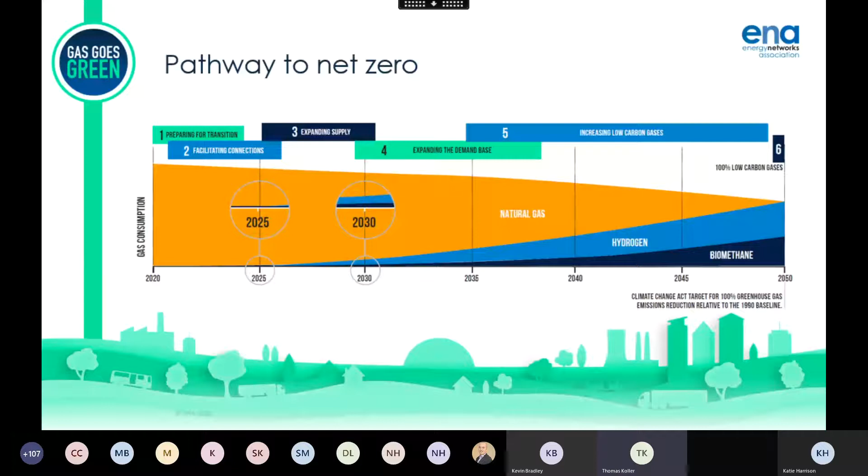In hearing from the expert speakers IGEM and ENA has lined up, we'll understand the timelines for gas safety management regulation changes, understand the timelines for IGEM's gas quality standard, understand the evidence base that's been developed to date, and also we'll hear about the gaps in understanding, where through their consultation IGEM would really like to hear from you all.

So, as you can see on the agenda on the next slide, we really have gathered together some of the UK's leading experts on this work, and we have a packed agenda for you. First up, we're going to hear from Ian McCluskey, who's the Head of Technical Services and Policy at IGEM, and Ian's going to provide us with an overview of the new IGEM gas quality standard for net zero emissions.

We're then going to hear from Dave Lander. Dave Lander Consulting has been working on a number of elements in regards gas quality, and he's going to discuss the Dutton method. Dr. Martin Brown, Principal Specialist at DNVGL, will then present on the domestic customer's case for change. And Dr. Sarah Kimpton, Senior Principal Consultant at DNVGL, will then discuss gas quality variations and industrial and commercial customer case for change. And we'll then hear from Dave Lander on the network safety impacts, before we then finish with a further Q&A hosted by Ian.

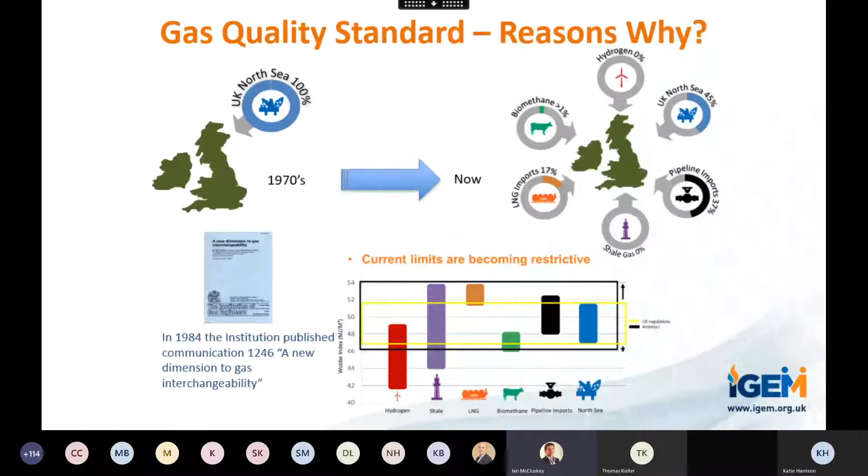Next slide, please. So in 2016, meetings were held with Ofgem, Health and Safety Executive, DECC, now BEIS, and IGEM, to explore setting up an expert working group to investigate potential changes to gas quality. It was agreed that IGEM would develop a new industry standard that would meet current and future gas supplies for the UK. At that time, it was proposed to initially examine the evidence base for changes to the upper Wobbe limit based on extensive research undertaken by SGN on the Oban project, opening up the gas market.

The expert working group would then later consider examining the evidence for the widening of the lower Wobbe index and other parameters. It was essential that the review process consider previous studies in this area, plus also look at current and new research to consider not just domestic, but also assess the impacts of any changes on industrial and commercial equipment, and also assess the impacts for network safety.

It includes the Health and Safety Executive, gas producers, networks, as well as organisations representing appliance manufacturers. I'd like to take this time to thank all members of the expert working group for their support and contributions to drafting of the standard. In particular, I'd like to thank Gus McIntosh of SGN, who's chair of the working group.

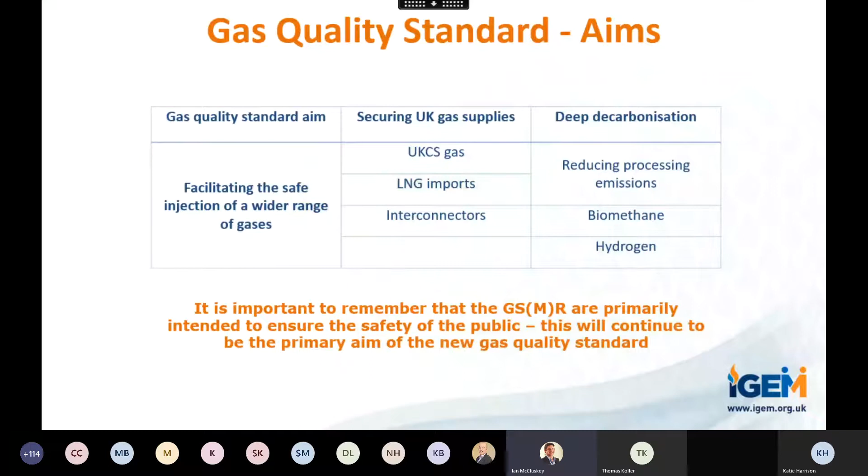Next slide, please. During the period of the review for the past 4 years, we've researched extensively many existing reports in this area. And on this slide, you see some of the reports that we're going to be outlining today include, for example, the SGN opening up of the gas market that I mentioned earlier, which is perhaps one of the most extensive areas of research ever undertaken.

SGN operating under an exemption to supply 4 Scottish towns with high Wobbe gases provides an evidence base for domestic and small commercial appliances, some 8,000 properties, some 11,000 installed appliances, and since the project ended in 2016, they have continued with random checks totaling approximately 4,000 checks.

Another important report is the industrial and commercial research into appliances and applied research into the effects of the wider range of Wobbe gases that was undertaken. There was also an impact study which examined the lower Wobbe index gases. The aim of that study was to provide the evidence of the impact of utilisation of gas of quality down to the existing emergency Wobbe index lower limit.

Another important report that Dave Lander outlined is that some 40 years since conversion, UK appliance types and designs are now widely different, and it is therefore considered appropriate to revisit the Dutton approach and assess its usefulness for existing and future gas supplies.

And finally, Dave will also talk about the study comparing pipeline fracture propagation risks from natural gases of differing Wobbe index, and the report examines whether there would be an increase in risk of pipeline fracture propagation in the event of any pipeline failure, and details an assessment of the change in risk associated with the conveyance of natural gases of higher Wobbe index.

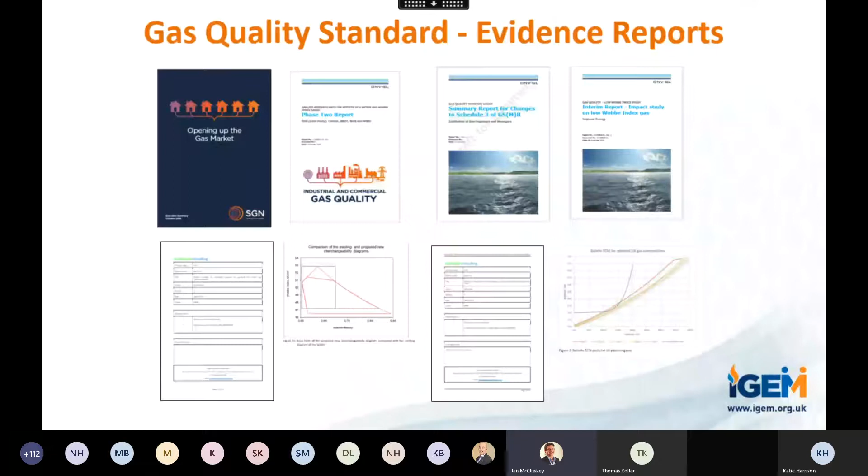Now, next slide, please. So now we've reached, as I've mentioned, this key milestone, which is the industry-wide consultation stage. And to support the consultation, we published this evidence report. It's called a key step on the pathway to net zero emissions. And the report explains the proposed changes to the gas specification, which I'll outline in a second, and provides reference to all the extensive supporting technical evidence.

The report outlines the existing gas quality issues, the updated Dutton interchangeability diagram, the case for domestic and industrial and commercial appliances, as well as the impact on network safety. Now, the proposed IGEM standard will be a dynamic framework for changes in gas quality, but the enduring safety of domestic consumers will be paramount, and the HSE will continue to have a veto on any proposals that could compromise safety.

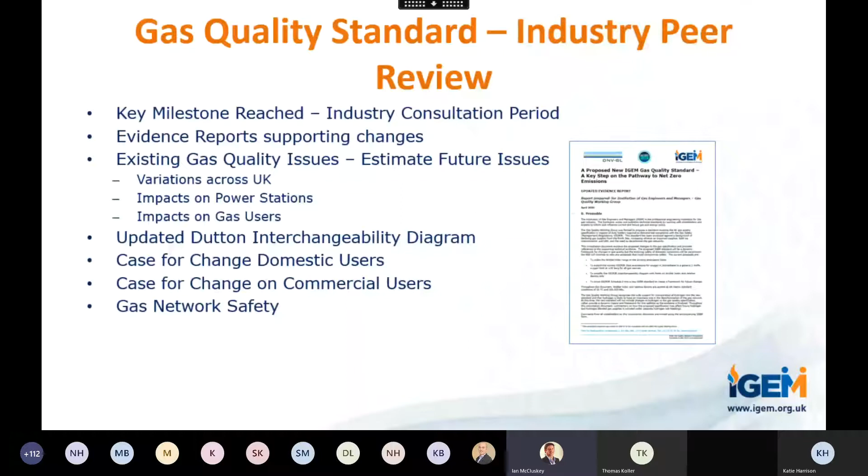Next slide, please. So I'll now introduce the changes that are being proposed, and within the report there is a table, and that table provides a summary of the proposed changes from Schedule 3 to the new IGEM standard. I've highlighted those in red. You'll see there's no change to hydrogen sulfide content. There is no change to total sulfur content. And at this stage, though we are preparing for it, there is no change to hydrogen being proposed. That still remains at 0.1%.

Oxygen content will move up from 0.2 to up to 1% for networks operating below 38 bar, which reflects the current class exemption for biomethane. We'll also widen the Wobbe index by decreasing the lower limit and increasing the upper limit. So the decrease to the lower limit is from 47.2 to 46.5 megajoules per cubic meter. We'll increase the upper Wobbe index limit from 51.4 to 52.85. The incomplete combustion factor will be removed.

And on the next slide, we'll continue with a summary of the changes. The sooting index will be removed by the proposal. And having removed those interrelated safety parameters, we're simplifying in the proposal the GSMR interchangeability diagram to a Wobbe index of the range that we described and introducing a new maximum relative density of 0.7. And finally, removing the upper and lower emergency limits, as these will now become the normal limits. Now, that's the summary of the changes.

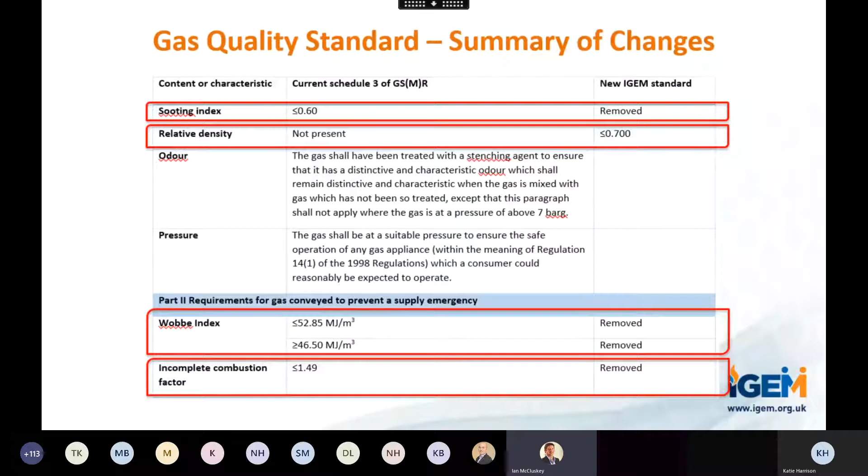On the next slide, I'd just like to highlight the link to the website. Now, IGEM's website has the evidence report. It also has the standard. It has a governance document on there for changes as well, the consultation period, and an example there of the link to the website. Please, we welcome your comments on the draft standard, particularly any comments relating to the scientific evidence which can be found on that link also. And that consultation period ends at the end of July, on the 30th of July.

So thank you for that. That's hopefully setting the scene for what's going to be presented to you in the sessions that will follow.

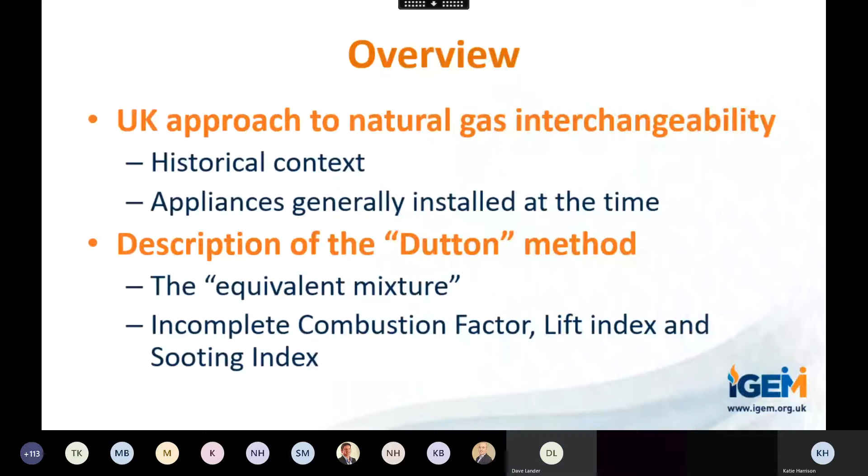Okay, so a little bit of discussion on the choice of the limit values that Dutton made then, and maybe a commentary on what we're proposing now. And probably the biggest change is the actual second of the two interchangeability parameters that are used. So we'll be switching or proposing switching from Dutton's GSMR interchangeability diagram to a simplified diagram that involves Wobbe index and the relative density. Next slide, please.

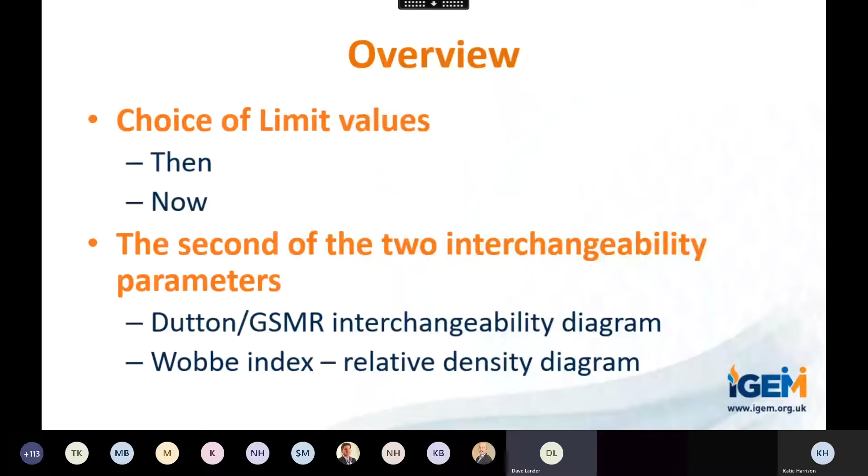Okay, so from a historical point of view then, most of this work really started in the 1970s and the 1980s. In that situation, we had southern North Sea gas fields dominating gas supplies, but it was anticipated that there would be a decline in those supplies, and those would be replaced by other sources, which would be different and more variable. And essentially those were northern North Sea supplies, which tended to have a higher Wobbe index. But also Dutton noted at the time that eventually these would be replaced by manufactured SNGs. That's probably not quite the scenario that actually panned out. I think we were anticipating in the late 1990s for substitute natural gas to be made in quite a significant proportion, but that hasn't happened as of now.

Okay, so there were drivers for interchangeability methods. So principally safety. Domestic appliances essentially have very limited tolerance to variation in combustion characteristics. So effectively you have to make the gas to suit the appliance and not vice versa. There's also a commercial driver, of course, and that is simply that you want to treat gases as little as possible in order to make sure that they're interchangeable. Next slide, please.

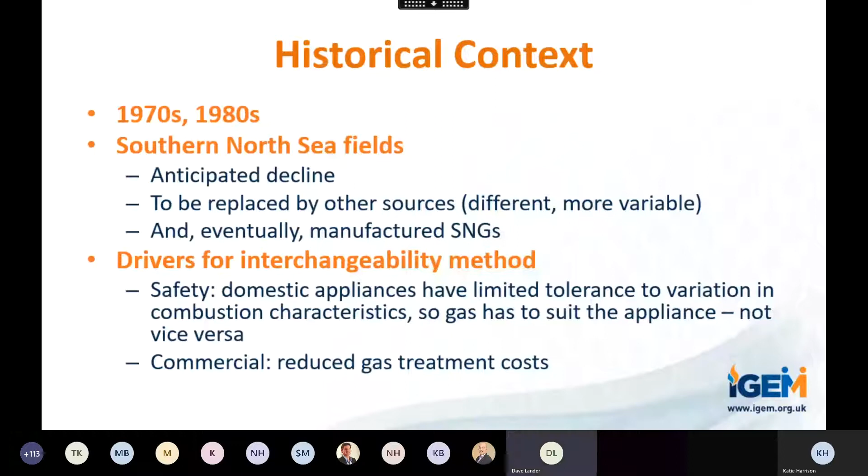So effectively, British Gas Corporation adopted the approach that was developed by Brian Dutton from the Watson House Research and Development Division. And there were a series of research papers that were published, but summarised in what is now the well-recognised IGE Communication 1246. So that was published in 1984, but based on experiments that were carried out in the 70s and the early 80s. It was a new approach at the time. Prior to then, appliance effects and flame phenomena that were related to gas composition were essentially related to functions that were effectively measured and very often based on properties like burning velocity. But Dutton's approach was to relate those to compositional variations.

You have to remember as well at the time that there were significant developments in gas analysis, and some of the early process gas chromatographs were being developed at around that time too. So it was a convergence of the ability to analyse gas routinely and cheaply and use that data to correlate properties of the gas being conveyed. And Dutton's approach was effectively implemented into the Gas Safety (Management) Regulations in 1996, and that essentially was at around the time of the initial start of gas privatisation too. Next slide, please.

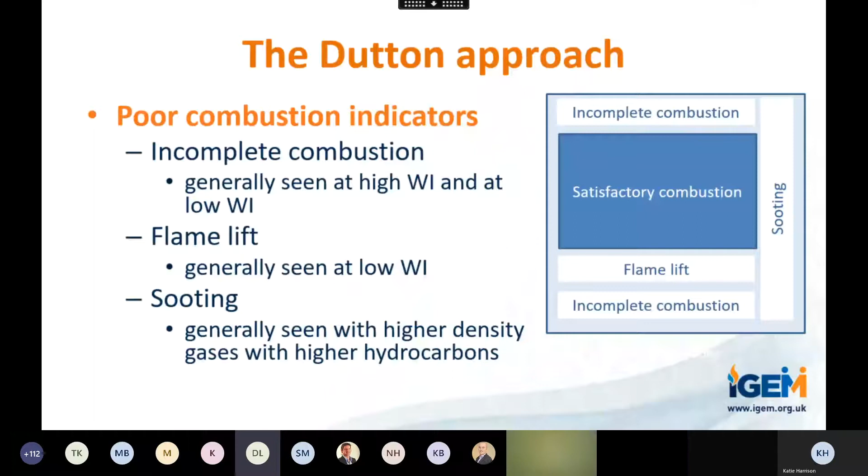And so those three poor combustion indicators were tested by Dutton, and he carried out testing of a variety of appliances that would demonstrate the three poor combustion indicators. So for incomplete combustion, Dutton looked at instantaneous water heaters, a very common appliance at the time. For flame lift, he looked at cooker hobs. And for sooting, he looked at radiant gas fires.

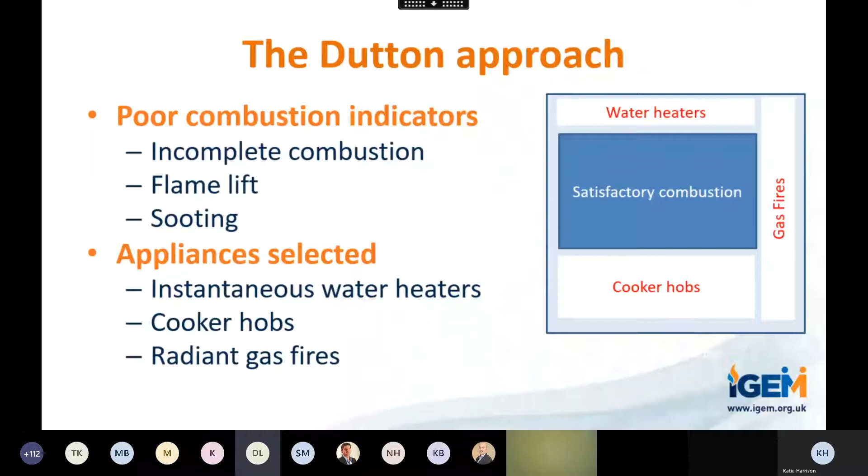Next slide, please. And it's the performance of those appliances which really set the basis for the limits in those particular properties. So I mentioned that the Dutton approach uses gas composition, and the first step is to simplify the gas composition. Natural gas is quite a complicated mixture. It sometimes contains more than 11 components, and so to get easier interpretation of the data, he converted the gas composition into an equivalent mixture of methane, propane and nitrogen, and in some instances hydrogen.

This process of converting to an equivalent mixture is a well-recognised approach, used quite often, particularly in reservoir modelling, where you can simplify a composition and get equivalent properties for that mixture. To do this, Dutton replaced all of the hydrocarbons with an equivalent amount of methane and propane. Any inerts were converted to a single nitrogen component, which preserves the Wobbe index of the original gas mixture.

So once you've carried out this process, your 11 component mixture is converted to a mixture of methane, propane, nitrogen, and possibly hydrogen if there is any in there. And so you have a simplified, what's called equivalent gas mixture. In carrying out the testing, he identified 3 interchangeability parameters that could be related to the composition of the mixture. The first was the incomplete combustion factor, which characterises the formation of carbon monoxide.

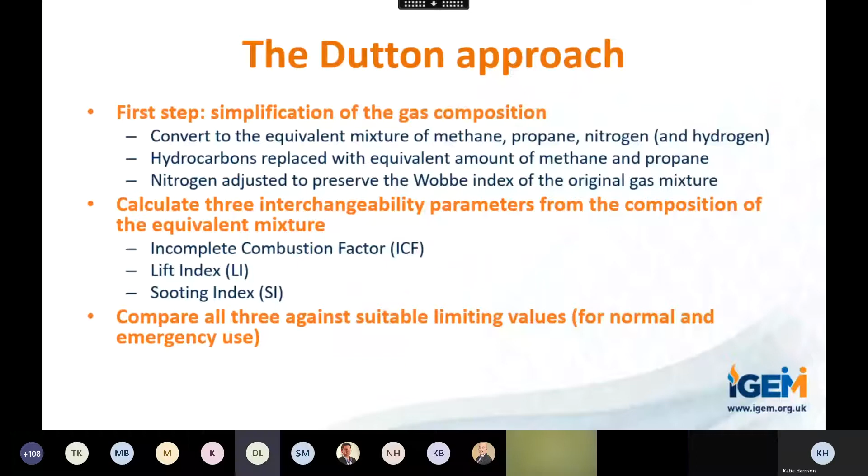So Dutton characterised limit values for all of these properties, but it's quite nice to be able to visualise the region in which normal operation is preferred. He did this by developing a diagram in which you plot Wobbe index and what's called the PN number, which is the sum of the nitrogen and the propane in this equivalent mixture. That allows you to visualise areas in which gas would normally be deemed interchangeable.

This is the simplified version, which was adopted into the Gas Safety (Management) Regulations. That central region is where normal operation gases will be considered interchangeable, bounded by 4 surfaces. The lines to the left are essentially compositions that are feasible. Anything to the left of that line would be considered unfeasible unless there was hydrogen in the mixture. For hydrogen-free gases, those gases just don't exist outside that region.

To the right, the line that slopes from top left to bottom right is the sooting index line. Gases to the right of that line would generate more soot than desirable. The upper and lower blue lines are the limits formed by incomplete combustion on the top line, the incomplete combustion factor, normally set at 0.48. That corresponds to a Wobbe index of roughly 51.41. Where the blue line intersects the red line on the left, that line is for a Wobbe index of 51.41.

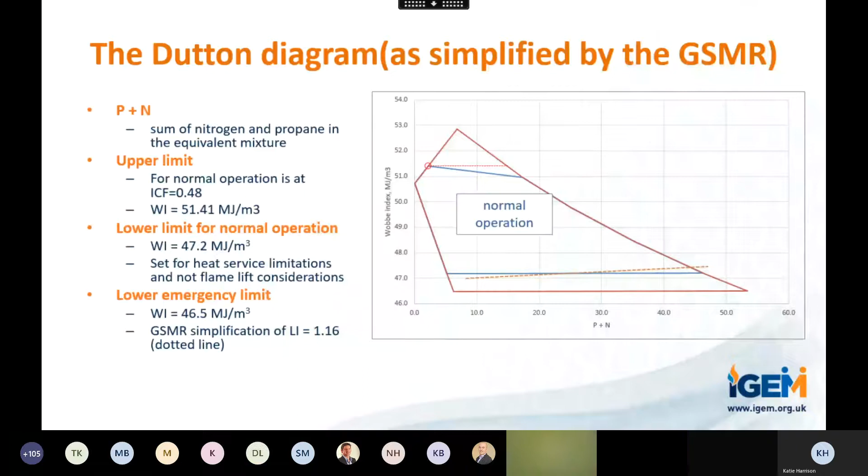Okay, next slide, please. So based on the Oban work that we had carried out with SGN, what came out was a proposal to replace the Dutton diagram plot for Wobbe index against the PN parameter, but to replace that with a Wobbe index versus relative density parameter. There are two key reasons for that. Firstly, it's consistent with practice elsewhere in Europe, Western Australia and the United States. During the developments on the European harmonised gas quality standard, the relative density Wobbe index plot emerged as the sort of favoured approach.

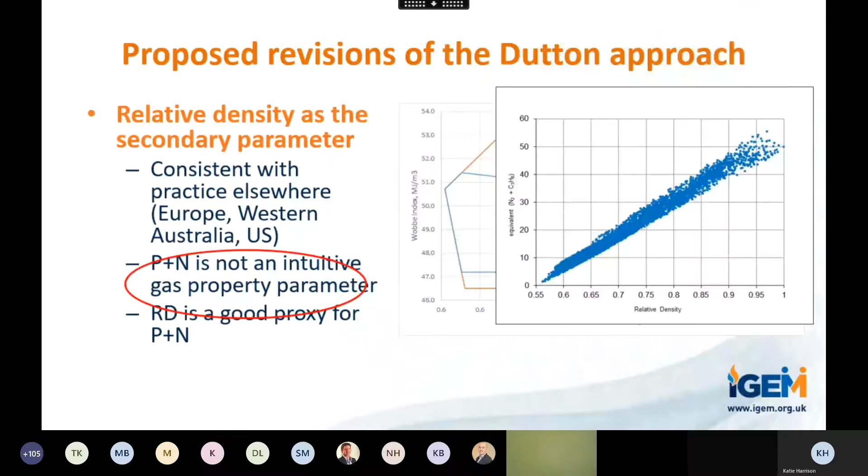Okay, next slide, please. So our proposal then is that relative density would be the second parameter, and we have proposed that the limit value should be set at 0.7, and that corresponds effectively with the European view, which developed when they developed the European standard EN 12676, which was subsequently adopted as a British standard.

The sooting index limit of 0.6 is not really a safety related parameter. It's really to do with discoloration of radiant heaters, and that value of 0.6 intersects with the 0.7 at around about that value that's indicated there. So the drop in the Wobbe index is quite small because the relative density constrains that drop quite effectively. There are very few gases in the UK that would have a relative density greater than 0.7. Next slide, please.

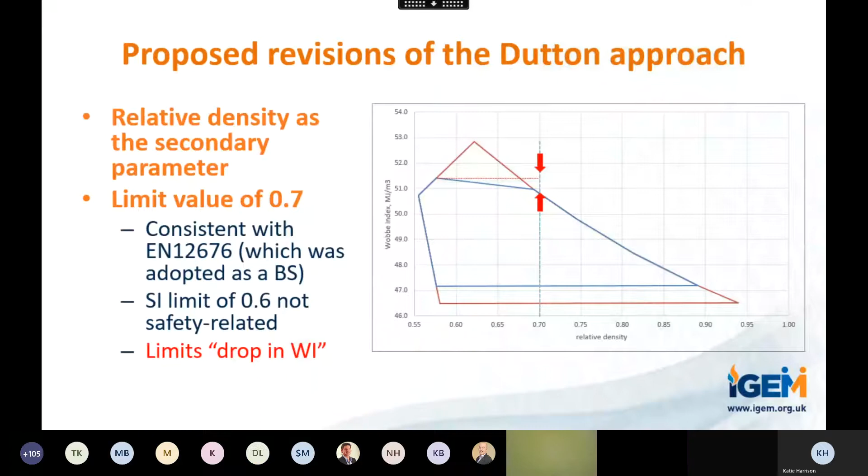So this is the proposed interchangeability diagram that incorporates relative density limits and also incorporates upper and lower Wobbe index limits. So in terms of the ICF limits, the ICF lines are close to horizontal anyway over the proposed relative density range, and so our upper limit is quite a tolerable simplification, and it's also consistent with practice elsewhere. Next slide, please.

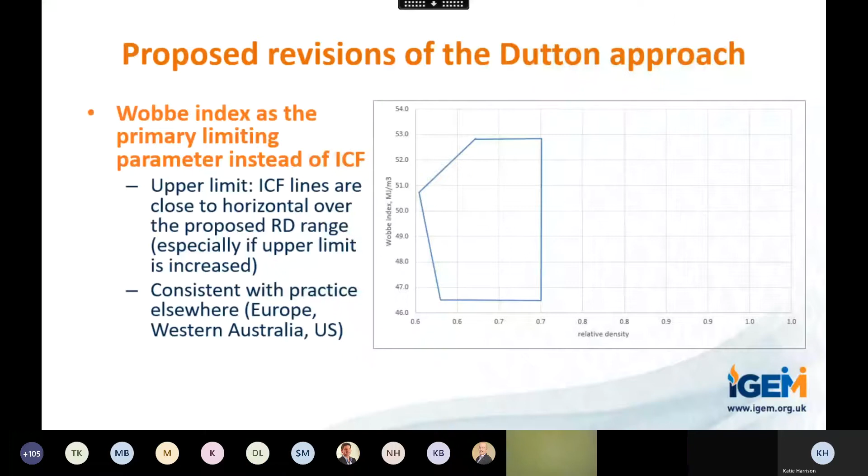So as I mentioned, our first proposal is that the upper limit value will be increased to 52.85, and that corresponds to the current emergency limit value. Next slide, please. And the lower limit value, we're proposing would be reduced to 46.5, which is the current emergency lower limit value. Next slide, please.

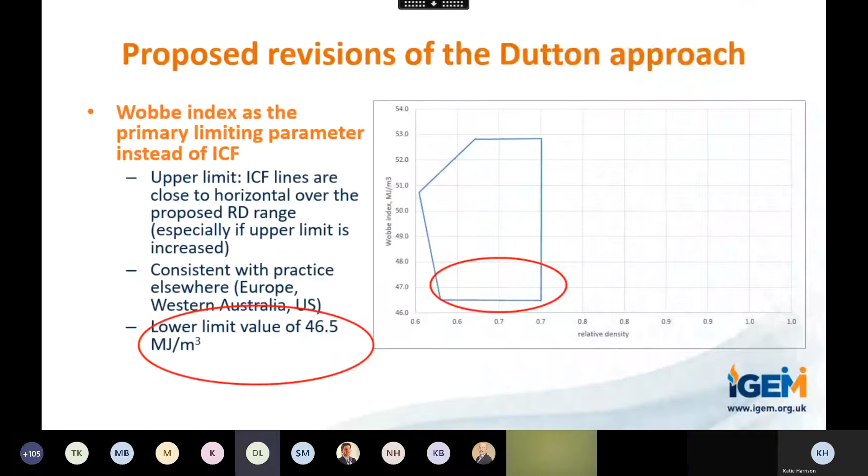So I'll just briefly cover the logic behind setting those upper and lower Wobbe limit values. So firstly, the upper limit, why should that be set at 52.85? Well, the main outcome from the IGEM project, the Opening Up the Gas Market project, was that domestic and small commercial appliances, when correctly installed, serviced and operated, can safely burn gas with a Wobbe index up to 54.7. So that's quite a high limit value. It's consistent with the main findings of the GasQual studies.

The GasQual study was the pre-normative study carried out by a consortium of European gas appliance testing laboratories, and they fed all of their information for consideration by the working group that developed the European standard on harmonised gas quality. So the OGM project produced findings that were consistent with GasQual, and equally those findings were consistent with earlier testing that was carried out by DNV GL in support of the UK tripartite gas quality study.

I should also say that that's also consistent with even more recent studies that have been carried out by HyDeploy, which is looking at addition of hydrogen into gas supplies. And again, there's a major body of technical work on appliances that is also justifying those limits too. Okay, next slide, please.

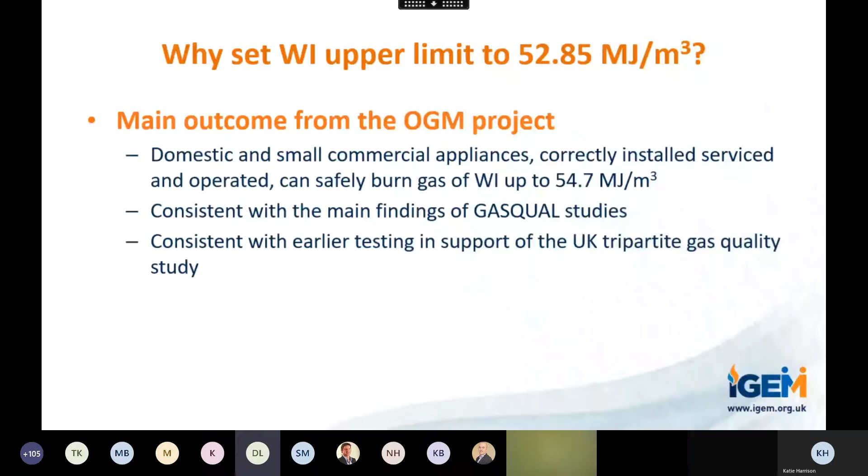It's also instructive to look at the origin of Dutton's incomplete combustion factor specification. So I'll just talk a little bit about incomplete combustion factor. So effectively, Dutton defined the incomplete combustion factor as the number of times that the CO-CO2 ratio in the reference gas has to be doubled to give you that you see in a test gas.

And Dutton chose the value to characterise incomplete combustion limit as being the instantaneous water heater, which is often unflued. And typically what he found was that the CO-CO2 ratio doubled every 1.5 megajoules per cubic metre. Now today's equivalent appliance, I guess, would be the combi water heater, the combi central heating boiler.

And if you do similar tests today, then typically what you find is that the CO-CO2 ratio doubles every 3 megajoules per cubic metre. And as a result, the correlations that Dutton produced that calculated ICF from composition didn't really correspond to today's appliances. Next slide, please.

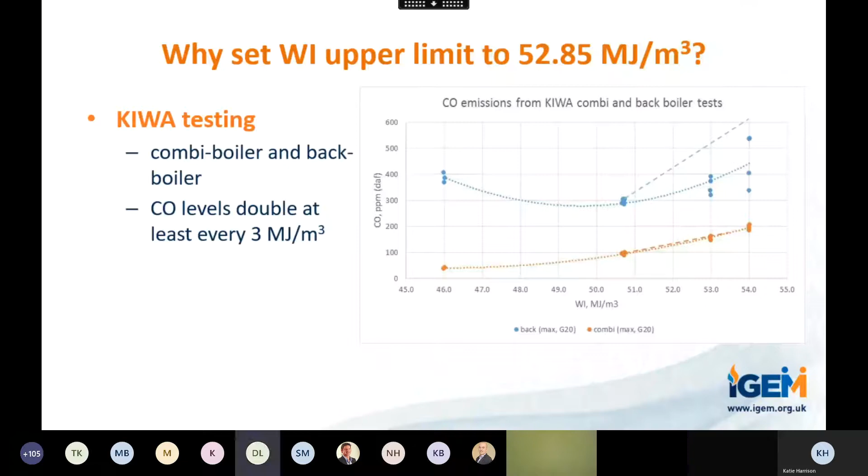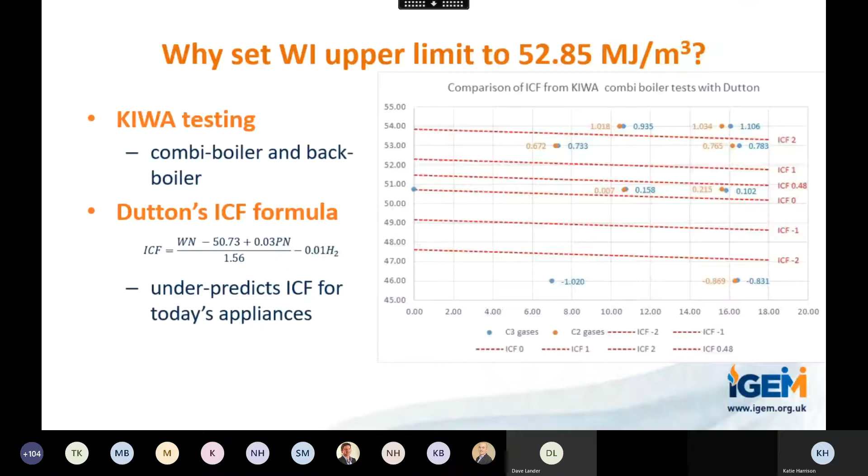So in terms of the ICF limit value itself, when Dutton was setting that, he was very conscious that traditionally at the time, the rich gas limit was set to around about 5% over that of the reference gas, which is G20, which is pure methane. And it should have been 53.3 megajoules per cubic meter, although there is some confusion in the actual communication, as he cites that as the wet gas value of 52.1. But essentially, for the dry gas basis, it should have been 53.3. But in fact, what Dutton adopted at the time was a value of 51.2.

And that really came about because of a survey of appliances that was carried out in 1978, which suggested that some appliances might have higher CO-CO2 ratios than would have been expected. It was a very small proportion of appliances, but they chose to lower the limit value, set it at 51.2 and not at 53.3. And the paper mentions that there was an expectation that they would review that in time. And there was a further survey of appliances, but again, they chose not to raise the limit value.

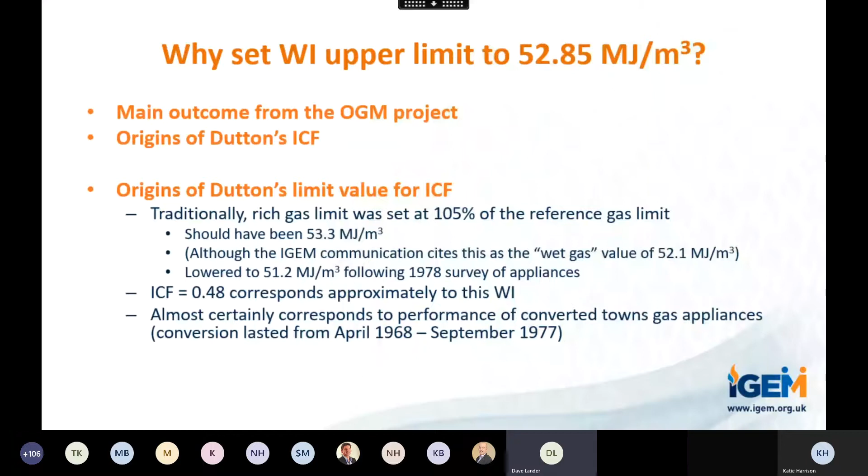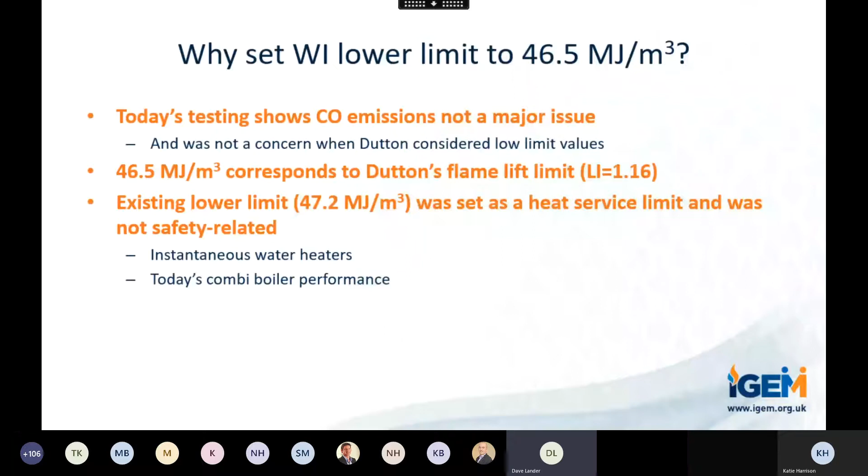The second change is the increase in the upper Wobbe limit value to 52.85, which is again more reflective of the performance of today's appliances. It still allows us a safety margin of 1.85 megajoules over the results of in-premises testing in the opening up the gas market project.

And finally, we're proposing decreasing the lower Wobbe limit value to 46.5. CO isn't really an issue at this level, and it's effectively Dutton's flame lift limit. We're proposing that that's the appropriate limit. The existing lower limit value of 47.2 was really set on the basis of heat service, and again, that's on the performance of instantaneous water heaters, at the time of natural gas changeover.

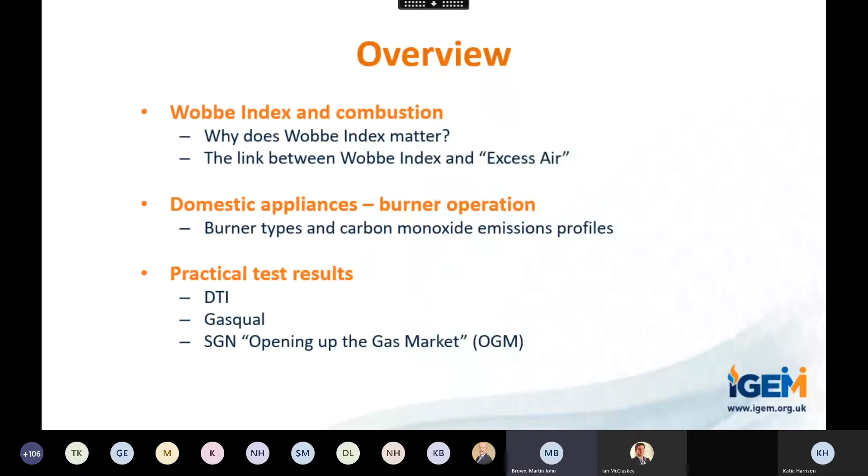So why do we get hung up about what Wobbe index actually is? Well, Wobbe index is a key indicator of what is termed gas quality, the ability of appliances or different equipment to actually burn gas. One of the nice things is that it's been adopted as a key parameter worldwide, so you can talk about Wobbe index and that's understood by combustion engineers, appliance development people, and gas quality people around the world. It's very important for determining the interchangeability of these different gases.

And why is it important? It's an indicator of the actual heat rate going to the burner. This has been discussed in the chat as well, if you've been following that. Different gases with the same Wobbe index should give overall the same burner performance on the same appliance. One aspect the Wobbe index links to is that it's related to the excess air available within the combustion system. Appliances will be set up for a particular excess air level to ensure good performance with the reference gas and enable the other test gases used to be burnt in those appliances while still meeting the certification standards for CE marking. So it's an important parameter, linked primarily to safety, performance, efficiency, and operation.

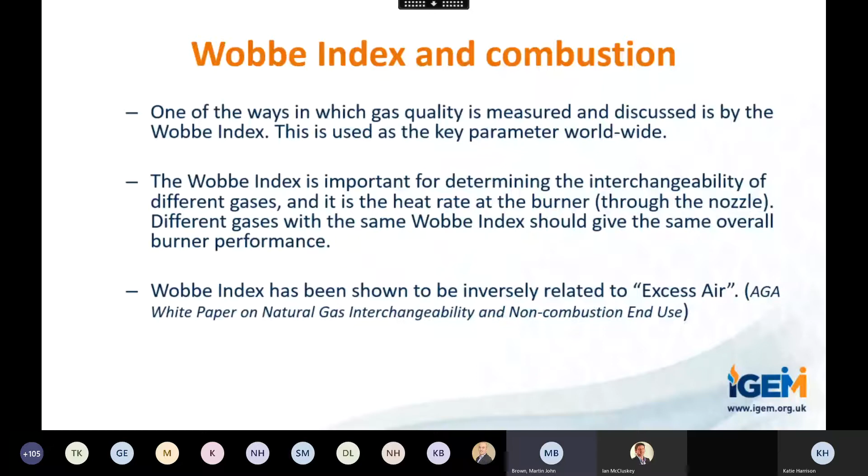Clearly, for stoichiometric combustion you don't need any excess air, so you'll be down at 0 for that. Now that would actually result in quite a high carbon monoxide emission, so the majority of systems tend to operate with at least 20, possibly even 30% excess air.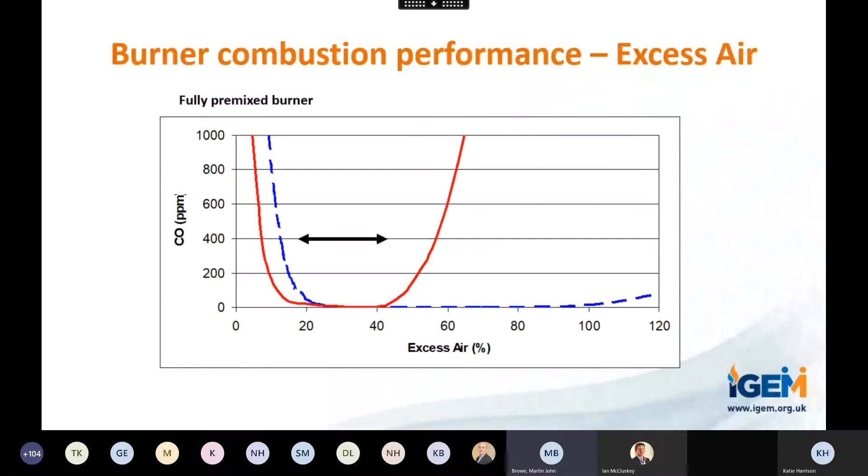As I mentioned in the introduction, the level of understanding that's been developed over a number of years has ramped up significantly. It was recognised early on that the impact of different gas qualities on modern appliances wasn't fully understood, and the DTI were looking to evaluate what the impacts would be through changes of the gas quality range that could potentially be distributed in the UK.

So they started some studies, sometimes called the tripartite studies, where they looked at different options with regard to gas quality in the UK, kicking it off in 2004 with a pilot study and then the main study in 2006. The pilot study was 5 appliances, the main study was 20 appliances. So it wasn't a large number of tests undertaken, but there were several key factors that came out of that.

A few years later, the EU Gasqual study ramped it up even further and did 100 appliances. Then with SGN's opening up the gas market study, they looked in Oban at around 2,000 appliances, and with the other Scottish independent undertakings studied, there were even more tests undertaken. So there's a good understanding now of what the implication is of different Wobbe index gases on a wide range of appliances, both in the laboratory and installed in a real environment in Scotland.

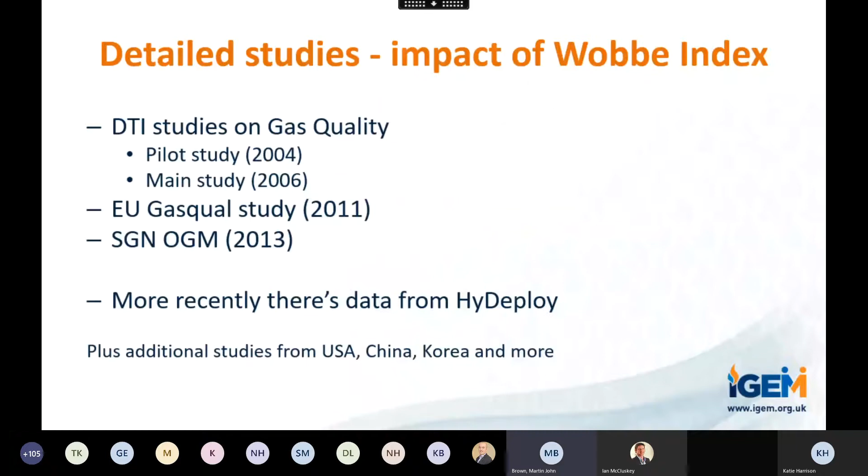So now what I'd like to do is just take you through some example results. And as I say, I don't want to dwell too heavily on this, but I'll be picking out a lot of trends and highlighting what the different studies have actually found as we go through. The format of the charts is very similar, and I'll just explain that in the first one, and then you can see how it cascades through to the others.

So for the initial study, as I said, 5 appliances. They looked at a Wobbe index range from 46 to 56, so slightly wider than has been considered for the potential changes to the requirements, the regulations that we're proposing now. But that gives a bit of a safety margin in terms of the understanding. With regard to the studies, it was focusing on the carbon monoxide and nitric oxide emissions, and then also looked at efficiency, and the efficiency was measured by a flue loss method. Next slide, please.

So here's a quick snapshot result of the 5 appliances. The 5 appliances are in the key on the right-hand side: condensing boiler, a water heater, a cooker, a fire, and a standard type boiler. The Wobbe index is on the x-axis, ranging from 46 up to 56. And the carbon monoxide emission is listed as a percentage on both of the left-hand and the right-hand y-axes. The left-hand one for most of the appliances and the right-hand one for the standard boiler.

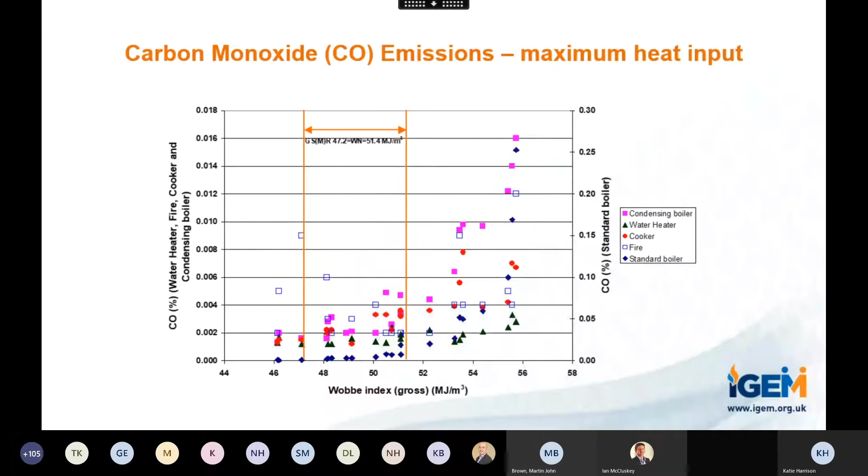That shows the impact on the NOx emissions. Again, it's on the left-hand side, the NOx ppm as a function of the Wobbe index on the x-axis, and you can see that the NOx actually increases as a function of the Wobbe index. Next slide, please.

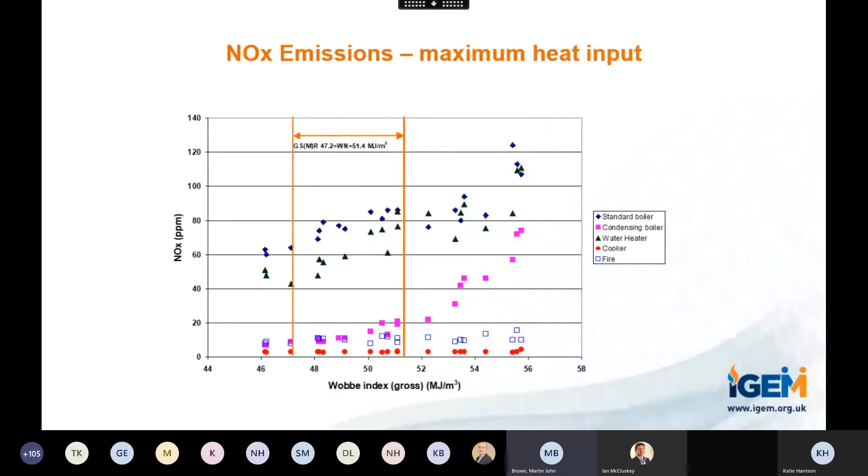And the flue efficiencies are reasonably constant actually, so there's not that much of a decrease in performance as you go down in terms of Wobbe index, and not much of an improvement in efficiency as you go up in Wobbe index. It's reasonably flat. There is a slight increase as you increase Wobbe index, but not significant. Next slide, please.

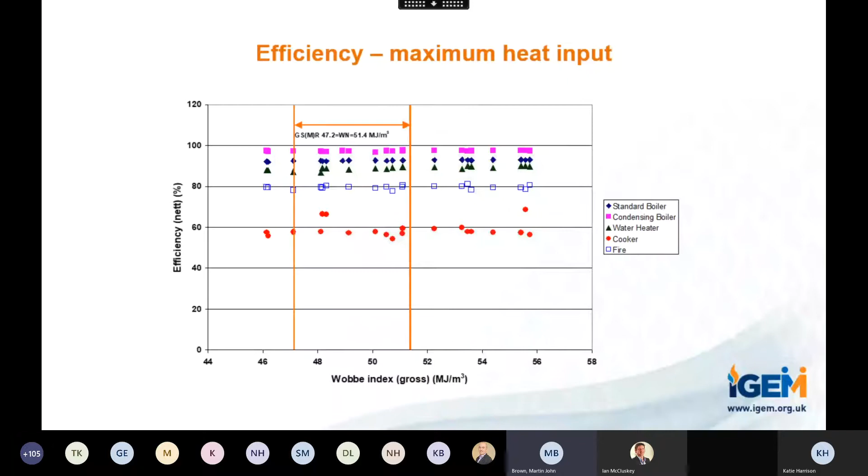So the first DTI study was then extended a couple of years later and increased the number of appliances to 20. These are mostly used appliances, but there were one or two new ones that were included in that test program. The Wobbe index range was from 45 to 56. Again, the focus was on carbon monoxide and NOx emissions, primarily from the point of view of safety, but also with regard to impact on the environment with regard to NOx, not only in the home for any indoor air quality aspects, but also NOx being emitted into the local atmosphere.

It was extended to actually include the impact of Wobbe index changes on the performance of the safety control systems, particularly the flame supervision device or the oxygen depletion sensors that some appliances have. The efficiencies were calculated in the same way as before. But they added in an additional test here where the appliances were serviced, so that the tests were done and then repeated once the appliance had been serviced, which could involve some maintenance work or some repair work, and the tests were then repeated with that serviced appliance. Next slide, please.

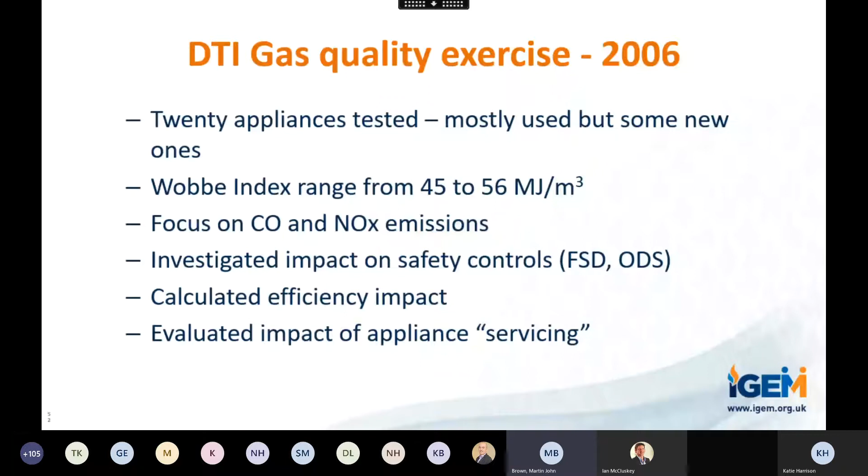So a quick example of the condensing boiler. Here it's got a premix burner, so it's the form of combustion profile that I showed earlier, and you can see that from a Wobbe index value of 45 up to 56 the CO emissions increase. Again, the gas safety management regulation band is shown in the orange bars. And the trend is fairly clear of increasing CO across that range.

If you prefer the dry air free CO percentage to be in ppm, you're looking at a range there from 0 to 400. So the values around the GSMR band at the moment range from around about 25 parts per million up to around about 75 parts per million.

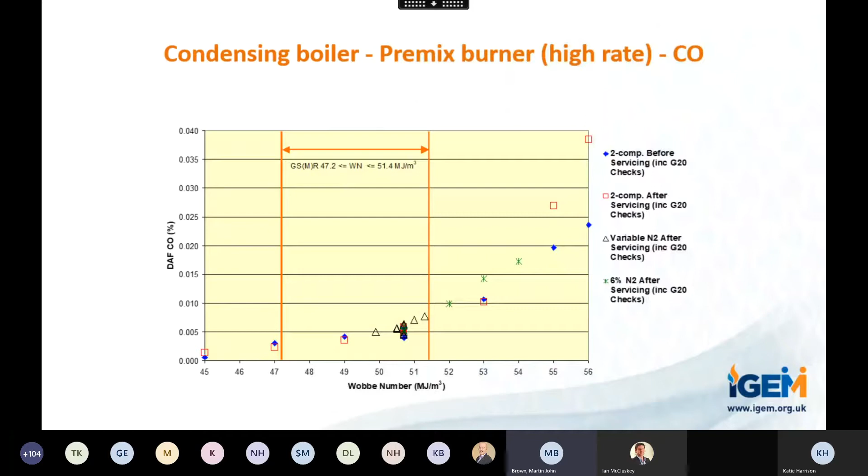You may query why there are so many different points at around about 50.7. That's the G20 reference gas. It's pure methane, and repeat tests were done with those gases after every other Wobbe index gas was tested to ensure that there was no lingering change to performance or impact from running those tests. So it was a cross check that the appliance was still behaving and operating correctly. Next slide, please.

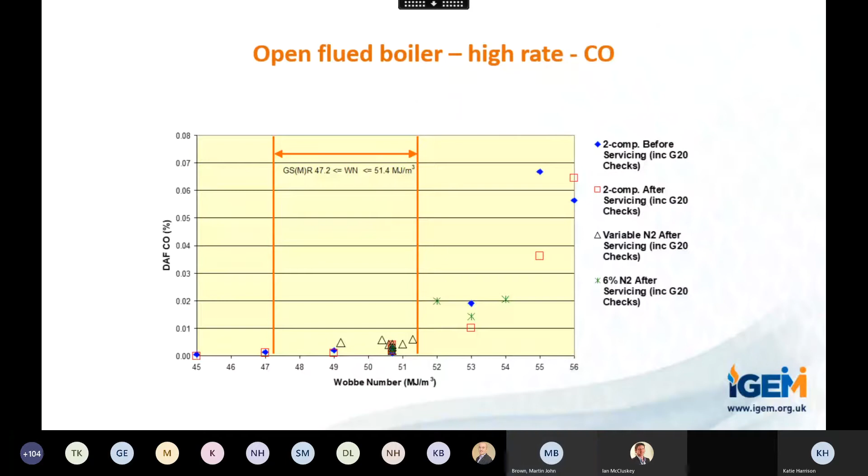The NOx profiles, as you can see, are very similar to the ones that we've seen previously, increasing NOx as a function of Wobbe index. Next slide, please. For the open flued boiler, the carbon monoxide, again, very low, within the range at lower Wobbe index, and then starting to increase as you go higher. But again, fairly modest increases. Next slide, please. And again, with NOx increasing as a function of Wobbe index. Next slide, please.

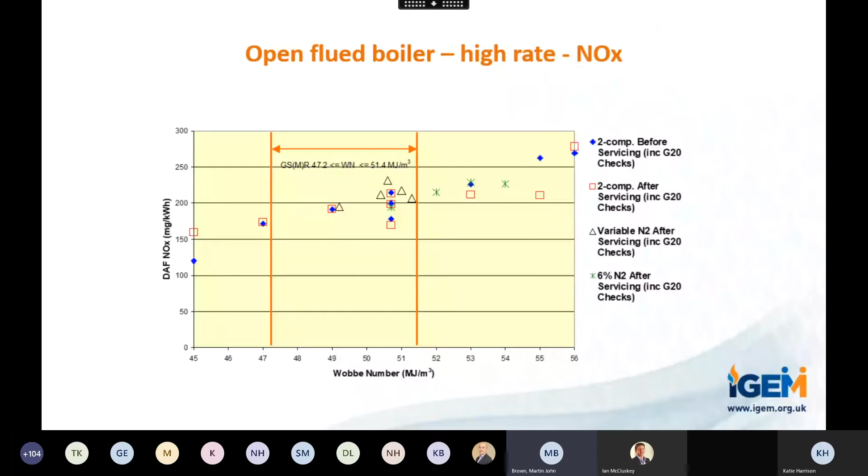GasQual took the testing program to the next level, and it was evaluating the impact of gas quality on safe operation, efficiency and emissions. 100 appliances were tested with a wide range of gas qualities. There were 16 companies involved in this from 9 countries around the EU, and 5 laboratories actually undertook a lot of the test work. Next slide, please.

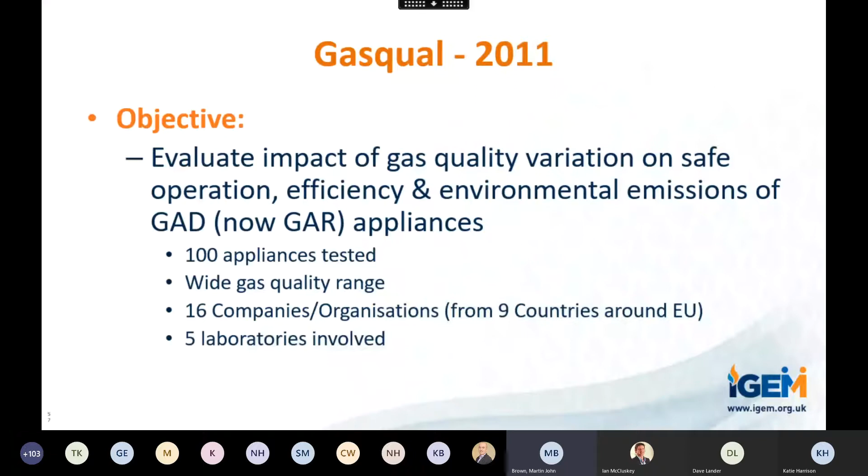The project was split into several work packages, and they involved both a study of the appliances that were actually installed around Europe, and an understanding of the different gas quality regulations and gas specifications that were actually in force around the different member states. It also looked at certification and how the appliances were tested for use in those different countries, and also a look at how the appliances were installed, particularly with regard to whether they were adjusted and altered at the point of installation rather than using factory settings.

Based on the range of appliances that were actually available, that sample of 100 were selected, tested, and then conclusions were drawn. And there's a bit of a feedback loop there to ensure that understanding of the results from the different tests that were undertaken was actually used to fine-tune the testing program. Next slide, please.

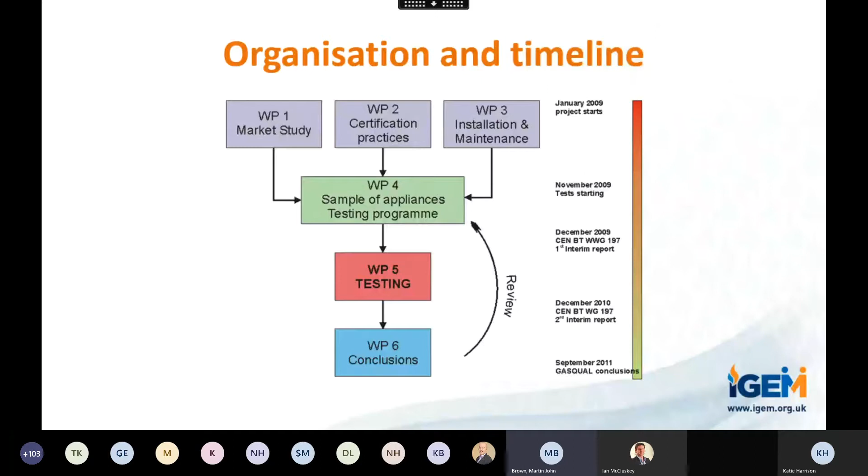The appliances were categorized into 29 separate groups. These were based on the different certification standards that we use for different types of appliance. So you get a different EN standard used for certifying a condensing boiler compared to a cooker and an air heater, different types of boiler setups and the like. So a fairly wide range. And the number tested in each of these clusters was based on the overall population distribution that was determined in that first work package. So there's a lot more boilers, so they actually tested more boilers. There were far fewer tumble dryers, that sort of thing. Next slide, please.

So you've got the test gases highlighted there with Wobbe index against relative density, the same sort of plot that Dave Lander presented, ranging from the one on the left-hand side being the G20, and then the test gases associated with a range of Wobbe index, and also exploring the impact of the different gases that might be available close to the 0.7 relative density value. Next slide, please.

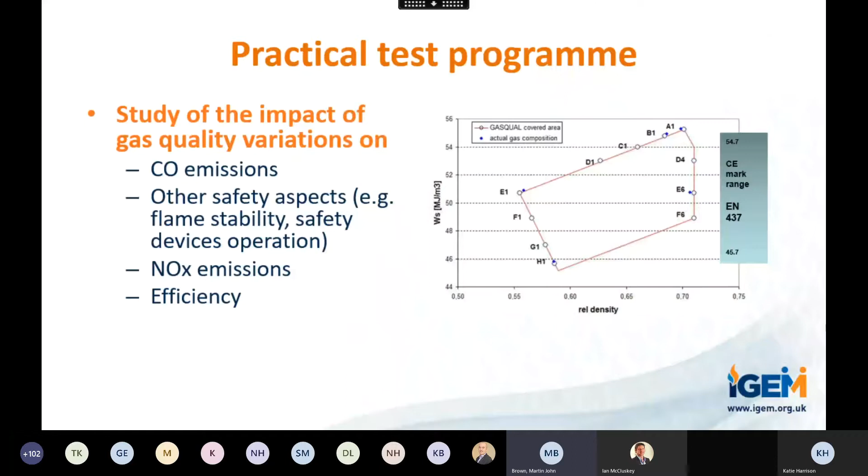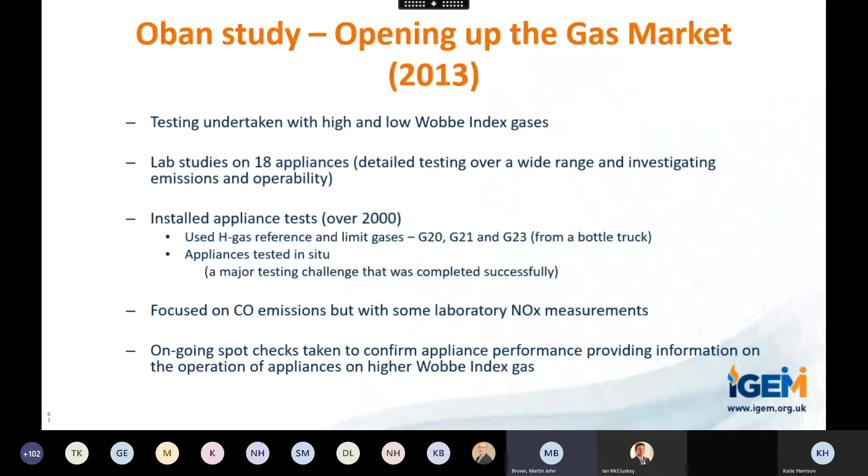So you've got your 3 points, one at 45.7, one at 50.7, and then the G21 at 54.7, that's the richer gas. You've got the darker blue current GSMR values. You've got the lighter blue box that's the proposed EASEE-gas European specification from 47 up to 54. And then you've got the exemption line that's highlighted at 53.25.

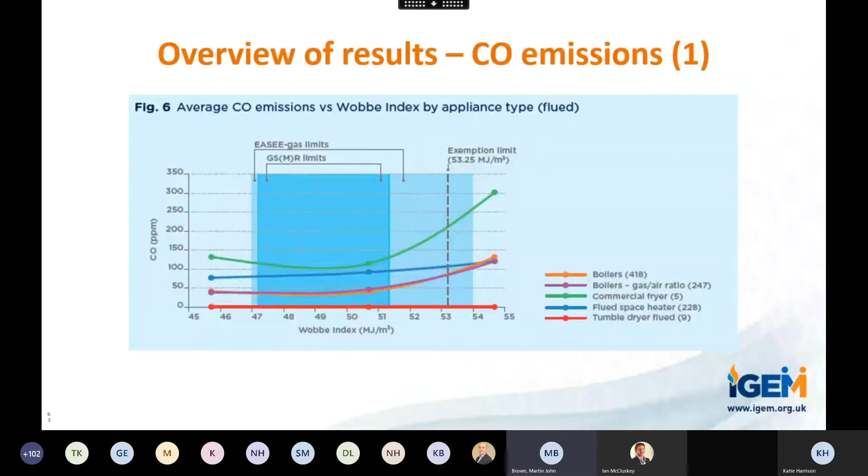The CO again is on the y-axis, Wobbe index on the bottom, and you can see that the trends for most appliances are that the CO increases as a function of Wobbe index across that band, or is actually flat. And again, look at the CO values; they're actually quite low in terms of what's in the flue. So very good performance really across that whole range. Next slide, please.

I think from the tests here, there's significant evidence to demonstrate that extending the range to what was proposed in Dave's presentation, down to 46.5 on the lower Wobbe index and up to 52.85 on the upper, is not going to constitute a significant increase in terms of the overall CO emission. Next slide, please.

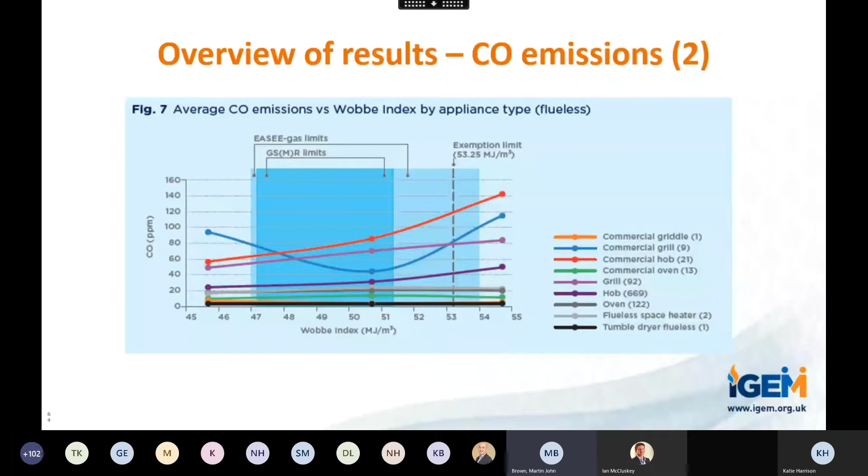So these data sets are actually giving us confidence now in terms of what the performance is in modern appliances, with several hundred, if not several thousand type appliances actually being tested to actually understand what those impacts are. Next slide, please.

So in summary, and just to wrap up, the practical tests have highlighted the general trends, and the general trends really are of increasing CO and NOx emissions with increasing Wobbe index, with one or two exceptions. However, the changes are actually quite modest. The tests on the installed appliances in people's homes and the laboratory tests as well demonstrated that down to 45.7 megajoules per meter cubed, there's no significant changes in terms of overall performance. Again, there's one or two appliances that still buck that trend, but it's clear for a significant proportion that it holds.

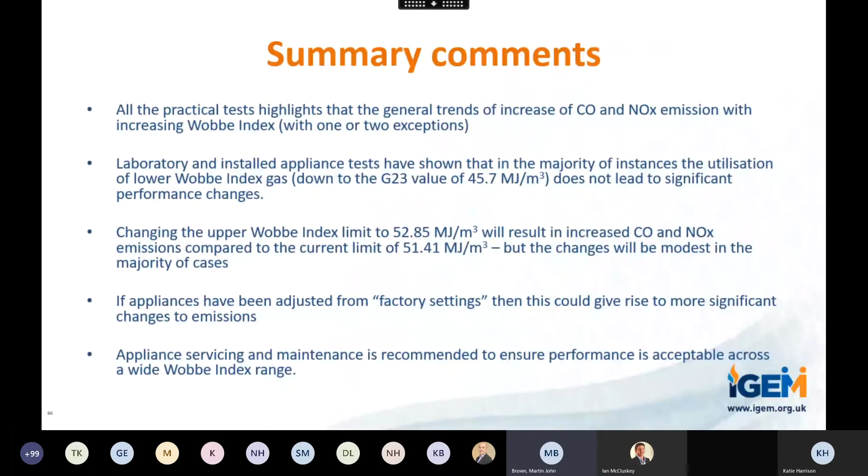Thank you, Martin. There's been good chat on the open study, and chat on hydrogen blend as well. There's been questions around, you mentioned the appliances have been correctly set up and maintained, and by who. You want to just add to that, Martin? Sorry, I didn't catch that. Can you repeat? So you mentioned appliances have been correctly set up. Yes. And maintained. The question was who by?

Well, that's a very good point, and that's something that I think should be considered in the future. We're not necessarily mandating that it's a legal requirement. We're recommending that appliances really are maintained, and Gas Safe engineers are more than capable to actually do those tests and ensure that that's the case.

In terms of initial appliance setup, I think the manufacturers do an excellent job in terms of ensuring that the appliances are set for the appropriate gas quality, which essentially is a mid-range value. And if that's the case, then it does give you the ability for that appliance to work right down at the low end, but also up to the high end in terms of the limits of Wobbe index.

Okay, I just want to touch on some questions about NOx emissions. Yeah. So if NOx emissions from typical appliances reduce with lower Wobbe gases, does that mean that hydrogen methane blends will reduce the NOx emissions from appliances as well? That's a very, very interesting question. There's some contradictory evidence in the open literature about what the impact is of hydrogen. Hydrogen blends can actually give a decrease in NOx in some appliances, but an increase in others that have been published. And I know there's a lot of development going on with regard to NOx with hydrogen and hydrogen natural gas blends.

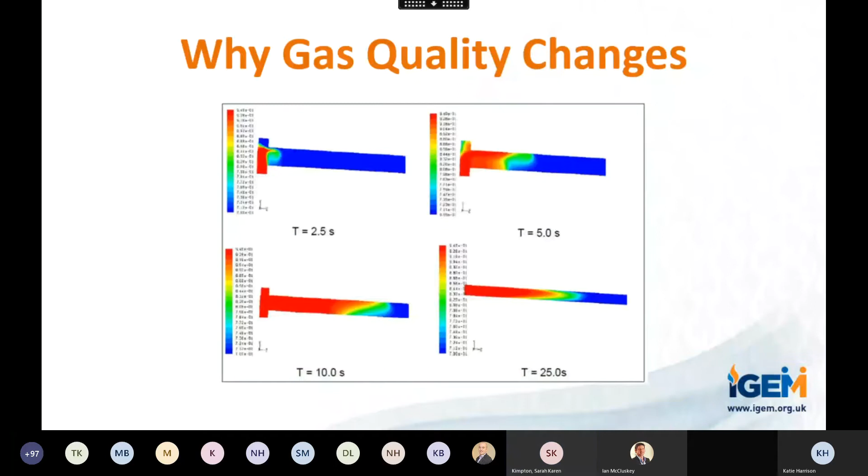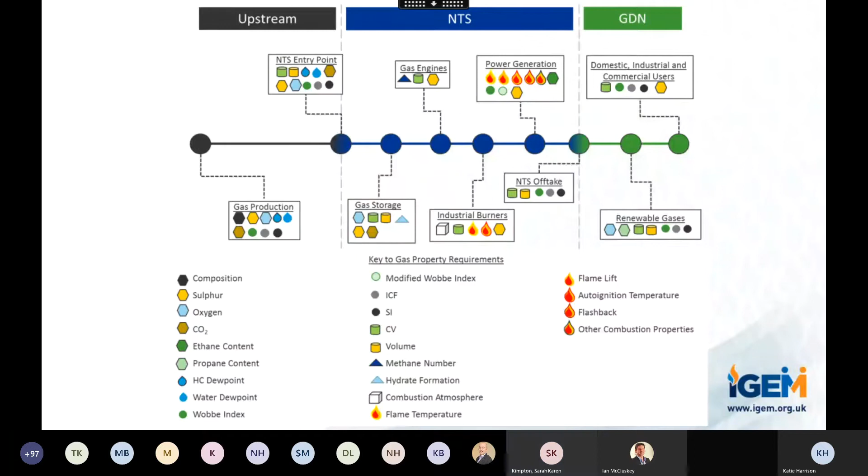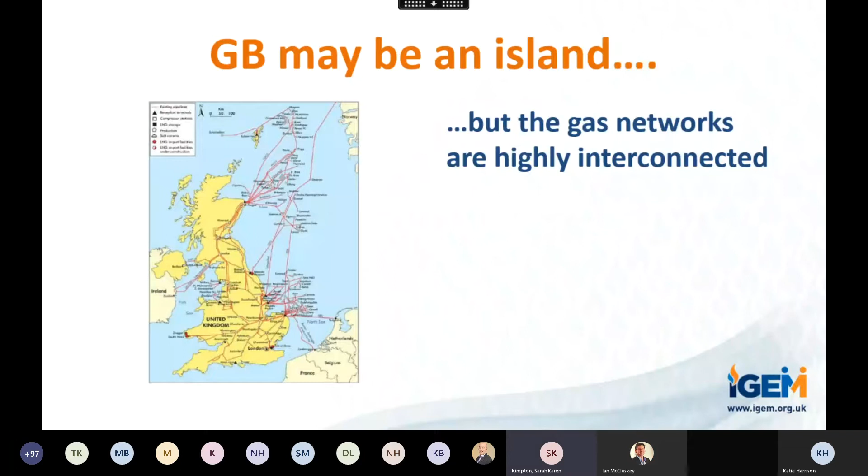So what we did, we looked at the gas quality data in the national transmission system over the whole of 2019. We took the data from the Ofgem-directed gas chromatographs at the NTS offtakes at intervals of about 4 minutes. Then we used a red, amber, green system to visualize the range of gas quality being received at an individual offtake, and also the rate of change of that gas quality.

So on the following slide, each part of the UK has got 2 circles on it. A big circle indicates the range of the gas quality. So if you have a large red circle, it means that there's a range of more than 3 megajoules per cubic meter at that offtake in 2019. The little circle indicates the rate of change. Now this was for 2019, and it will be different every year.

There is no place on the network where the gas quality is always stable. Note that it also depends what you mean by stable—are you talking about stable CV, or do you want stable Wobbe index? They're very, very different. As an aside, the Federal Energy Regulatory Commission in the US recommends that the maximum rate of change for customers should be 2% per minute in Wobbe index, and this equates to about 1 megajoule per cubic meter per minute.

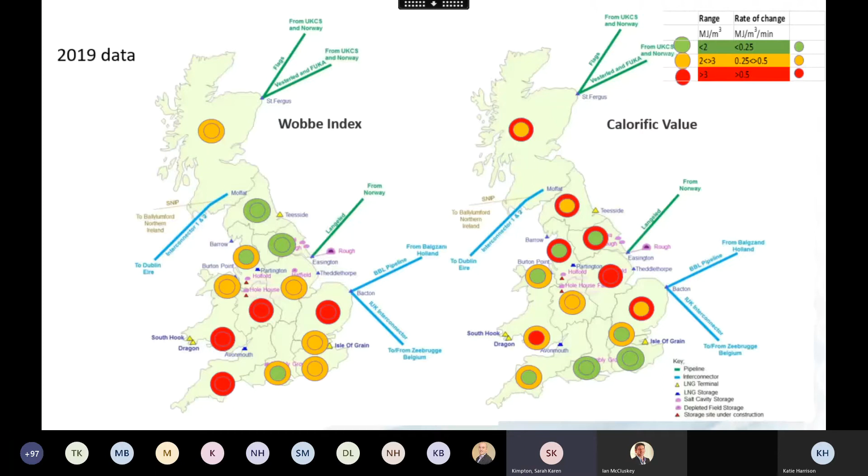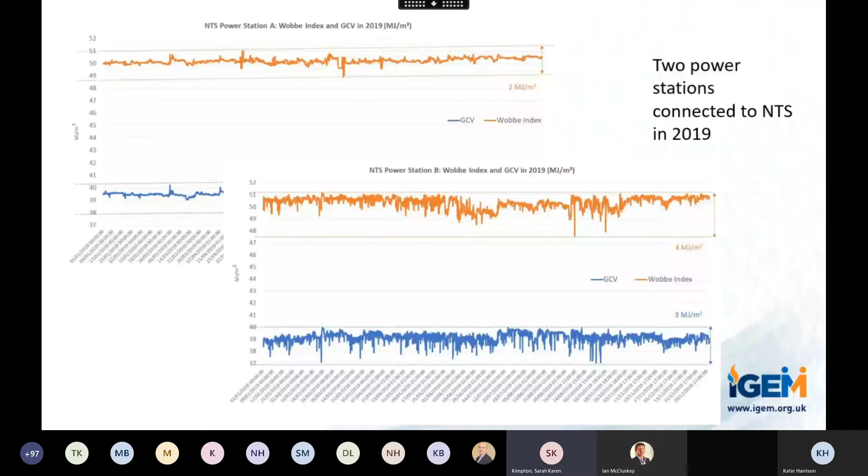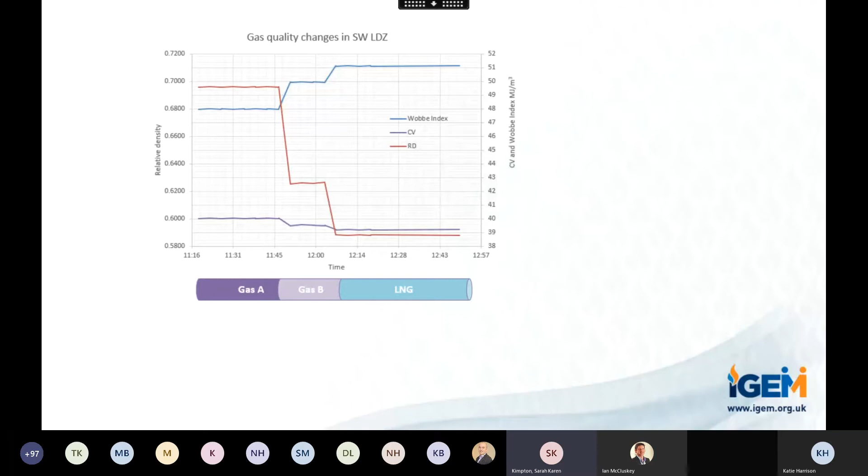If you click again, please - well, that should show the gas composition. I'm a little bit concerned here, my laptop is just installing some software. Don't know why.

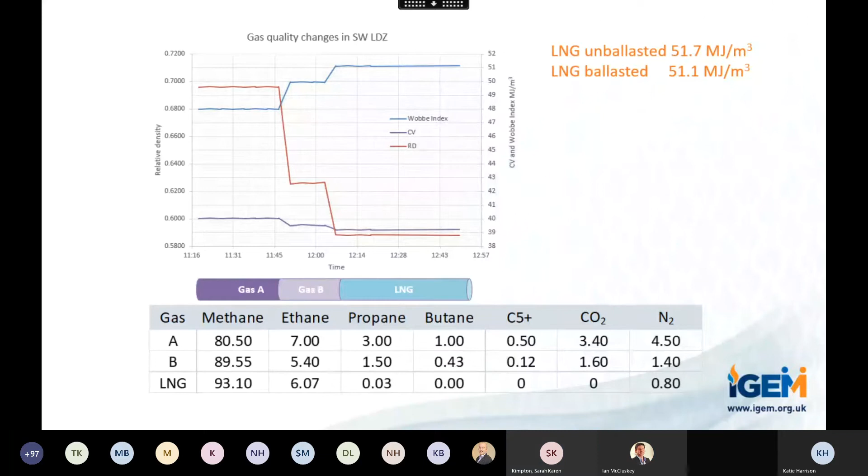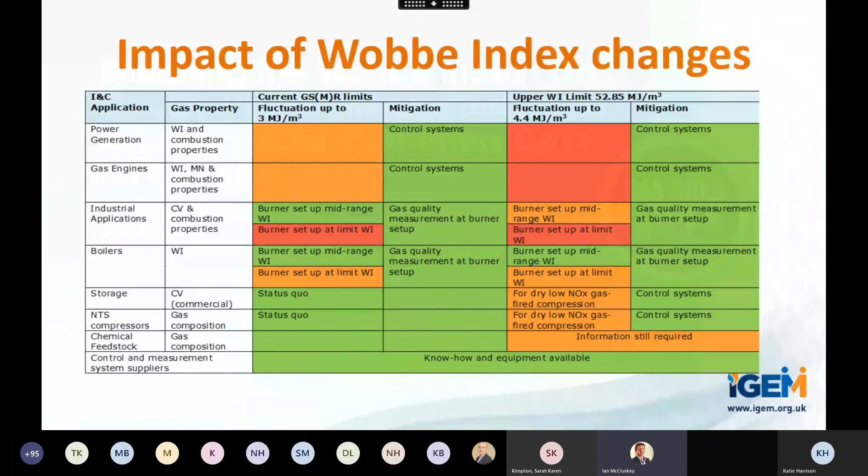Thank you, Sarah. Some chats have been around looking at some biomethane and potentially looking at flow weighted average CV and the effect of not ballasting LNGs with nitrogen. It would be useful to maybe look at that as a potential modelling exercise. What's your thoughts on that, Sarah?

As far as flow weighted average CV is concerned, there is currently a network innovation project being undertaken by Cadent, where we're looking at better ways of billing customers so that the bills that they receive is much more close to the gas that they're actually receiving. So we are addressing that, and if we can do that, then that would negate the need for biomethane to be propanated. It would also mean that if you had a very, very high CV gas or whatever, you would be able to get that in as long as it was within the GSMR limits. I'm not suggesting that CV is one of the GSMR limits, but yeah.

Thank you, Sarah. So yeah, we're looking at that. Brilliant, thank you. Well, we'll move on to the final session now, and I'd like to invite Dave Lander back to talk about the network safety impacts, and we'll have a Q&A session at the end of that as well. Dave, over to you.

Okay, thank you, Ian. Could you have the next slide, please? Just by way of an overview, I'm really just going to answer two questions which came up at an early stage during the activities of the working group. First question is really about flammability limits. So would the hazardous area limits and procedures for gas escapes, for instance, need to be revisited if the Wobbe index limits were changed? Secondly, we had a query over pipeline fracture propagation. Essentially the question is, would an increase in the Wobbe index limits result in an increased risk of fracture propagation? Okay, next slide, please.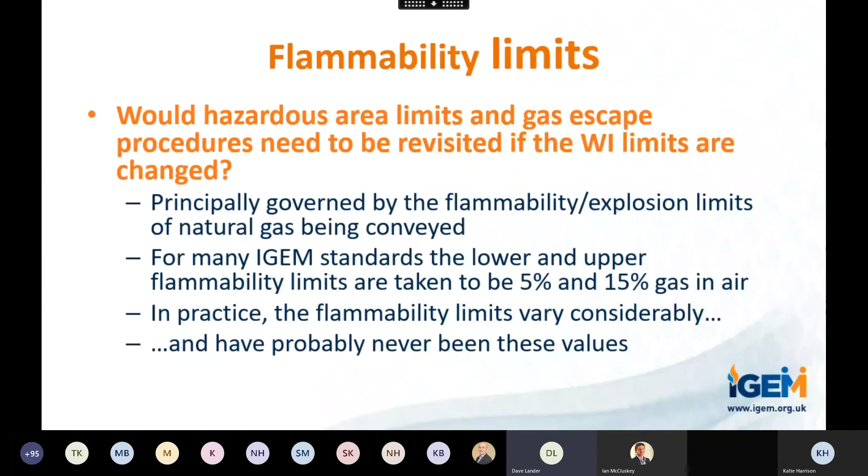Next slide, please. So here I'm just going to illustrate the variation that you see in UK gas quality. Taking the lower flammability limit, that varies typically from around 4.5 to 4.9%. Next slide, please. And you'll see that this traditional value that we take for LFL of 5% is actually quite way outside what we actually see.

Next slide, please. And many of you will be familiar with the mean Bacton gas composition, which is taken to be representative of the early natural gases that came from the southern North Sea. And that mean Bacton gas composition has a lower flammability limit of 4.9%. Next slide, please.

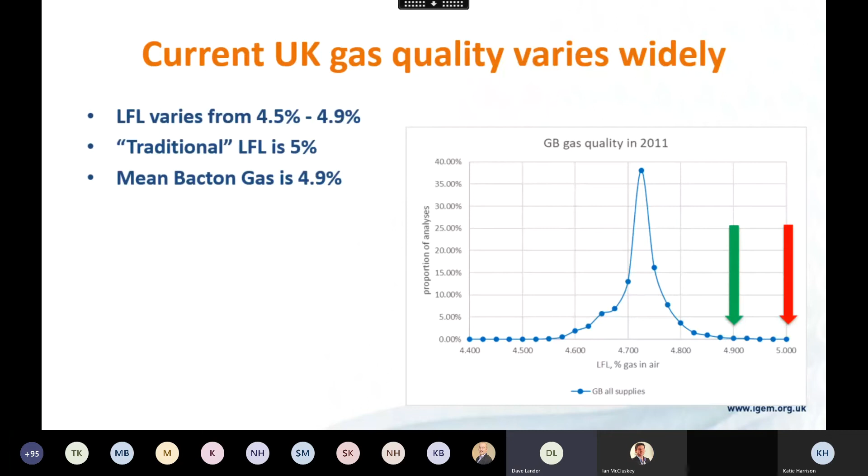The current LNG that arrives at GB, that has a lower flammability limit that varies from around 4.64 to 4.96, but typically it's quite a narrow band, and you can see that that's what causes the spike in overall gas quality in that area.

Next slide, please. In fact, current worldwide LNG varies quite widely. You get some that centres around about 4.8%, and some of the richer LNGs tend to have a flammability limit that sits around 4.6%. And so when you look at the UK gas quality, what's happened is that it's been shifted slightly by the ballasting that we see in order to admit the gas with an appropriate Wobbe index. So if you go to the next slide.

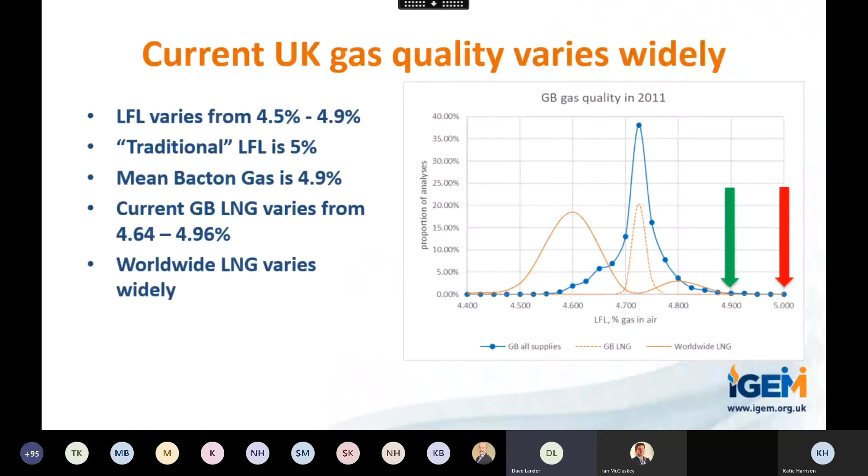What we've got here are typical sources of LNG, and what you find is that the ballasting does tend to affect the lower flammability limit, but it's not a great amount. So if you look at the grain and the grain ballasted composition, so typical compositions from grain, then you would see ballasting the gas so that its Wobbe index goes from 52.19 to 51.25 gives a change of around 0.07% gas in air in the flammability limits.

So it's not a great amount, but that causes the shift from the value for worldwide LNG to sort of a central value within the UK range. Next slide, please.

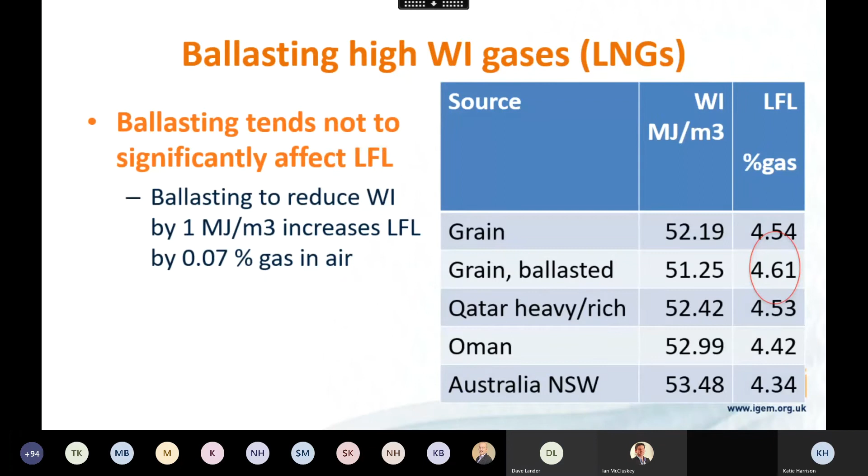So with the IGEM gas safety standards, most often you consider the impacts at 20% of the lower flammability limit. As I say, traditionally they would think of that as being 1% gas in air. And also, many of the IGEM standards use mean Bacton gas as the basis for setting their standards, and the flammability limit of that is 4.9% gas in air.

Next slide, please. So what that actually means, in practice, is our safety margin isn't really 80%, which is 100 minus 20%. So if we have current UK gas quality, we're currently enjoying a safety margin of around 78 to 79%, 79.6 if we only considered mean Bacton gas. But as we've seen, mean Bacton gas is not really representative of UK gas nowadays.

And for the LNGs, with quite a wider range of flammability limits, the safety margin will decrease slightly from 77 to 78. So there's still quite a lot of overlap in what we currently enjoy in terms of safety margin, but in practice, the safety margin is not 80% and not that much different to what we are currently seeing. So we don't anticipate there being an immediate need to change the criterion. Okay, next slide, please.

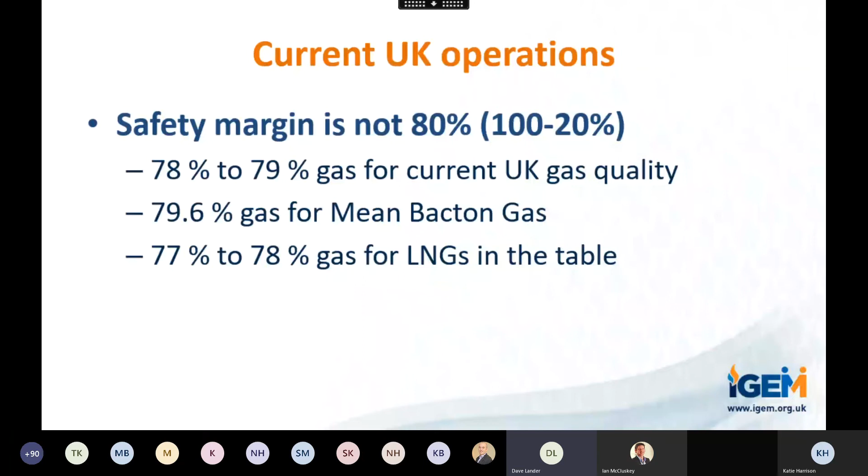The next question really then is pipeline fracture propagation. And the question really is, would the risk of fracture propagation increase if the Wobbe index limits are changed? Okay, so the key thing to understand here is that generally gas transmission pipelines tend to be constructed from high strength steel. They're generally preferred because the reduced construction costs and the higher capacity, because you can construct them at higher pressure and higher sizes, offsets the higher materials cost.

However, you do have to consider the ability of such steels to arrest a propagating ductile fracture. They need to be tough enough in order to arrest a fracture that would be generally caused by outside forces. So if you had mechanical damage to a pipeline causing a fracture, then you don't want that fracture to sort of propagate indefinitely. And so your concern is to have steels that are tough enough in order to withstand that. Next slide, please.

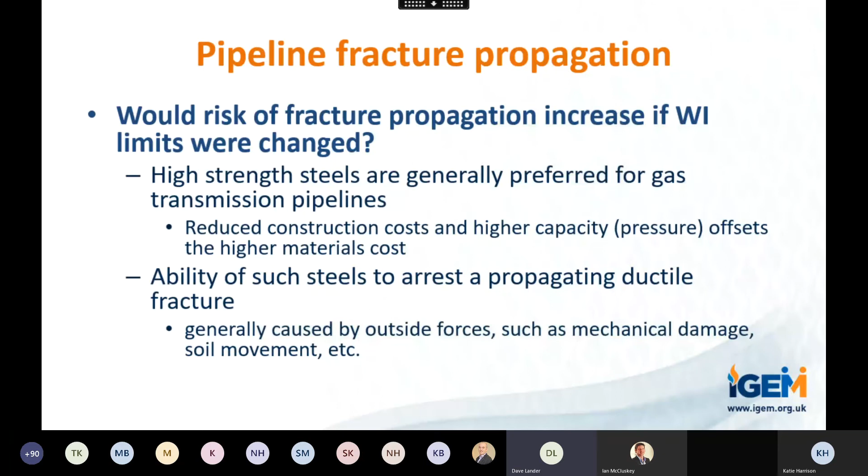So essentially, pipeline operators tend to use what's called a Battelle two-curve approach, and they can use that to show that fractures will not propagate beyond a small number of pipe joints. And in order to do that, you compare the fluid decompression wave velocity and the crack propagation velocity. So essentially, when gas escapes from the pipeline, the fluid will drop in pressure as it escapes, and the pressure will fall within the pipeline itself. And the rate at which the decompression occurs is a property of the fluid.

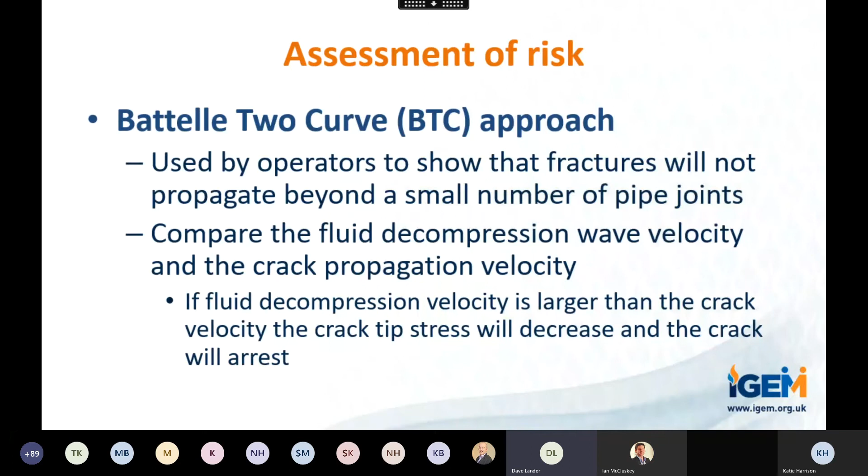And the key thing is that if the fluid decompression velocity is larger than the crack velocity, then the crack tip stress, the stress at the tip, will decrease and the crack will arrest, and vice versa. So if the fluid decompression velocity is a lot lower than the crack velocity, then the pressure is maintained at the tip of the crack, and that will then make the crack propagate further. Okay, next slide, please. And so you can visualize that on a curve.

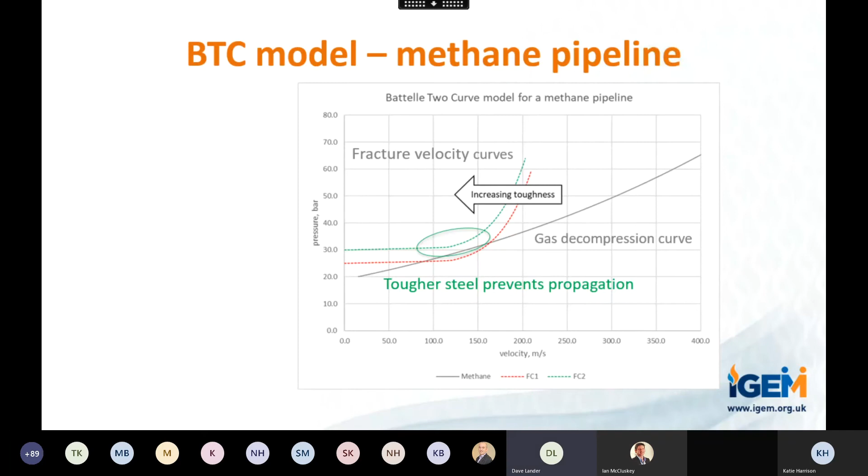Okay, next slide, please. So for this assessment, what we did was to compare the relative risk that would be posed by differing gases. So essentially what we did was to examine gas decompression curves for various gas compositions. The gas decompression curve will be dependent on the thermodynamic properties of the fluid, as well as the starting pressure and the temperature in the pipeline at the time of fracture.

Next slide, please. So the gases that we looked at are a set of pipeline gases from GB import terminals. We had access to compositions that were characterized in quite fine detail by a consortium that was looking at hydrocarbon dew temperature measurements and calculations. And so that provided us with a set of gas compositions that were typical of that being imported into the

UK in 2009. We also have compositions of LNGs, which are characterised by the NIC project opening up the gas market. We can use those when they're ballasted and unballasted. Those compositions are all available in the report that forms part of the technical pack for the gas quality working group. Next slide, please.

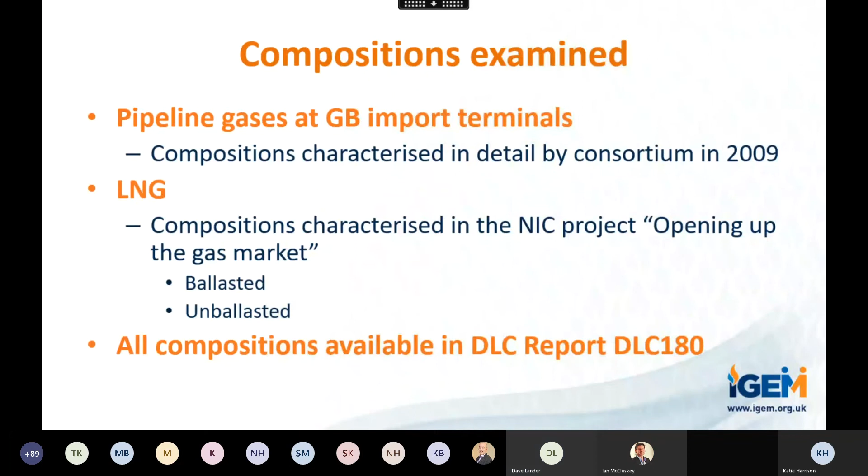Okay, so for the pipeline gases, this is the sort of behaviour that you get. The first thing I need to point out is that the fracture curve, the dotted line, is illustrative only, with an exclamation mark, because it's not intended to be a particular section of pipe in any particular gas transporter's network, but it's just illustrative to show the principle that's involved in the Battelle method.

So you can see here for these pipeline gases, the red line is the one that shows the greater risk of propensity, and the grey line is the lower risk of propensity to propagate cracks. The red line has a Wobbe index of 49.54, and the grey line has a Wobbe index of 49.45. And yet, beg your pardon, intermediate between that is the green gas, gas E, which has the highest Wobbe index of them all, which is 50.23. So there isn't really a clear pattern in terms of Wobbe index and propensity for pipeline fracture propagation. So next slide, please.

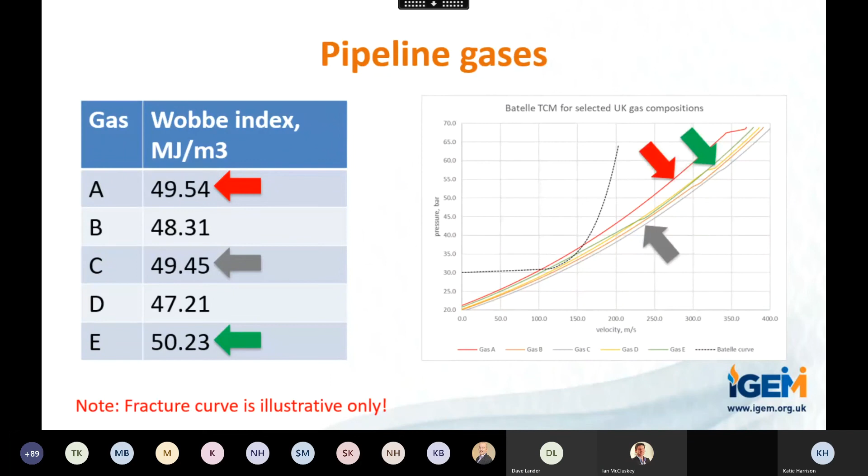And in this slide, these are for the LNGs that we looked at. What I've got here is the purple line, the lower of the lines. You can see that's an LNG from Grain, and it's also an LNG from Grain that's ballasted. If you look extremely closely, you'll see that there is a slight difference. You can see a slight suggestion of a dotted line, but essentially the points are the same and the decompression curve is the same. And yet they've got differing Wobbe index.

And if you look at another LNG, the Qatar LNG, illustrated by the green arrow, you'll see that it has a shift which swings to the left, shifts the velocities to lower velocities, and you can see that it comes much closer to the fracture line. So what you can see from this, and you can see it with other compositions, is that ballasting doesn't actually change the risk of a particular gas. If a gas shows some propensity for increased risk, then ballasting doesn't in fact affect things at all.

So it's not really a Wobbe index issue. As usual with a lot of gas quality parameters, they tend to be correlated with each other, and it's not necessarily a sign of causation. It's just that some of these gases are associated with high Wobbe index. So if we leave the limit as it is and, say, admitted Qatar gas, adding nitrogen to ballast it to bring its Wobbe index down would in fact not change the risk at all.

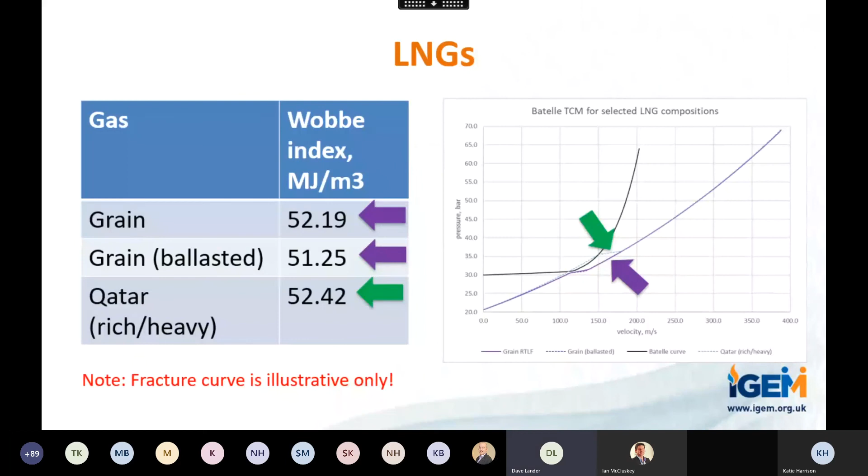Okay, next slide, please. So I'll just try and summarise these two questions then. The flammability limits vary widely for existing UK gas anyway. The lower flammability limit was never as high as 5%. And as a result, our safety factor was never really 80%. It was around 78% in the early days for Mean Bacton Gas. And for most unballasted LNGs, it would change from around 78% to 77 to 78%. So there's not a significant change in the safety factor that we would enjoy with a different unballasted LNG.

As far as pipeline fracture is concerned, then it's not really a Wobbe index issue. It generally tends to be high density gases, which can be exacerbated by hydrocarbon liquid formation. So on those LNGs where you sort of shift in the curve, what's actually happening is the gas is entering a two-phase region, i.e. hydrocarbon liquids are dropping out a little bit, which increases the density and decreases the decompression wave velocity.

And ballasting doesn't really alter that risk. And so it's not an obvious parameter to specify that would control that risk. So certainly Wobbe index isn't an appropriate thing. It wouldn't prevent that risk from occurring. Existing compliant gases show varying risk, and the risk really is dependent on the pipeline properties and the operating conditions, as well as the gas fluid.

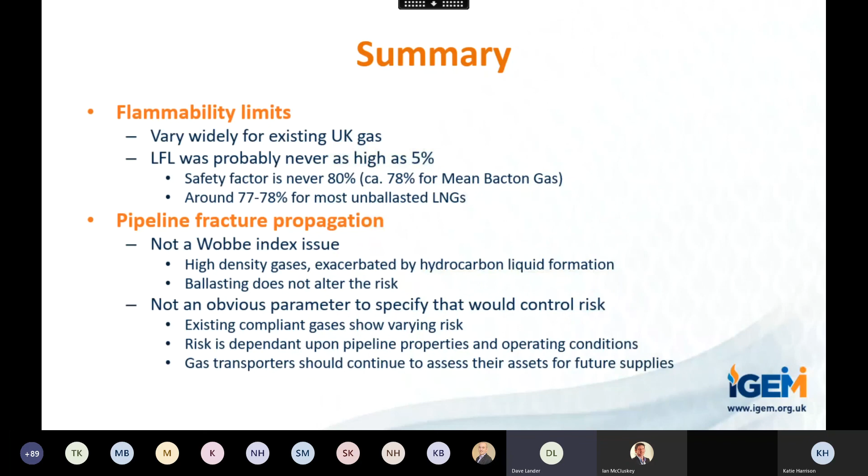Okay, I think that's the end of that. So not sure whether any questions have emerged on the chat. Thank you, Dave, on that one. I think you've got a very comprehensive presentation there on the network safety implication. Admittedly, this may be the first time that people have seen the study that you've done here. We would welcome any comments you've got on that. Please fire them into us all. We'll get around to questions that we haven't answered at the end of the session, and we'll certainly feed them back out as well. If you'd like to go on to the next slide, we'll close out this particular session.

The consultation is open now until the end of July, where we welcome any of your comments. Please go onto the website, please have a look at it. In terms of timescales, we will then collate all the comments that we've got, we'll bring them back into the group where necessary to respond, to take into account anything that we maybe missed, and appreciate all your comments that you fed in today. Now that can take, depending on the number of comments we get, maybe a month, 2 months.

And by the end of that period, we'll then have a body of evidence from the industry comment period, as well as all the studies that we've now collated, and we'll bring that to the Health and Safety Executive in the form of a bundle of safety advice and safety case information to support any of the changes that we've made. Now that can take us maybe up to around October, where potentially, depending on how things go with timescales, we could be looking at publishing the IGEM standard.